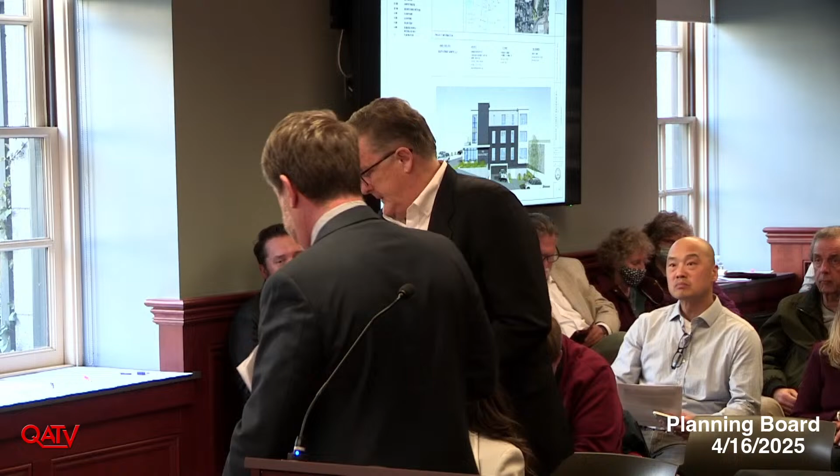Yeah. This will forward, okay.

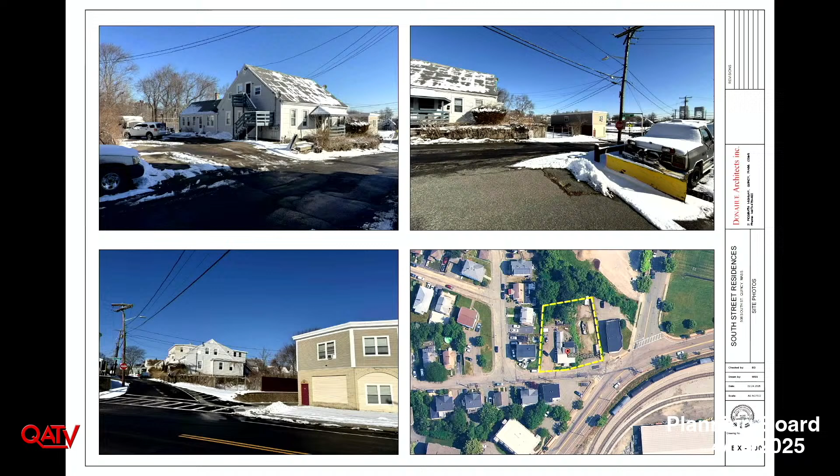Madam Chair, members of the board, Brian Donahue, Donahue Architects, 27 McGrath Highway in Quincy. We were retained by David and Cindy to look at this site in the fall, and we noticed the site had some challenges to begin with. So the site, in my mind at least, is a buffer between a residential zone and a very industrial zone. We all know the shipyard is diagonally across the street. So we've got a real transition here.

So what we tried to do from a design and aesthetic standpoint is find a happy medium and mix the two. These first slides show the existing property, the existing home. The lower right shows the site in context, with the shipyard to the lower right. So we're really on that precipice of the industrial area.

So what we tried to do was take advantage of the topography, although it is a difficult site because you have a drop in elevation from north to south, which is basically up and down on this aerial. From the top left to the bottom right, it drops about 10 feet. So we tried to take advantage of that to position the building and provide under-building parking with grade parking as well. More context photos, our site and the infamous shipyard.

So these two site plans, because we do have a level of parking below, show the grade. Basically on the right shows the lower level where we have 21 parking spaces. So 21 units, 21 parking spaces that Ed mentioned. Each unit will be deeded one space. And then there are 14 spaces up on the upper level elevation. And as Ed mentioned, those will be either rented or someone can buy those or deed them.

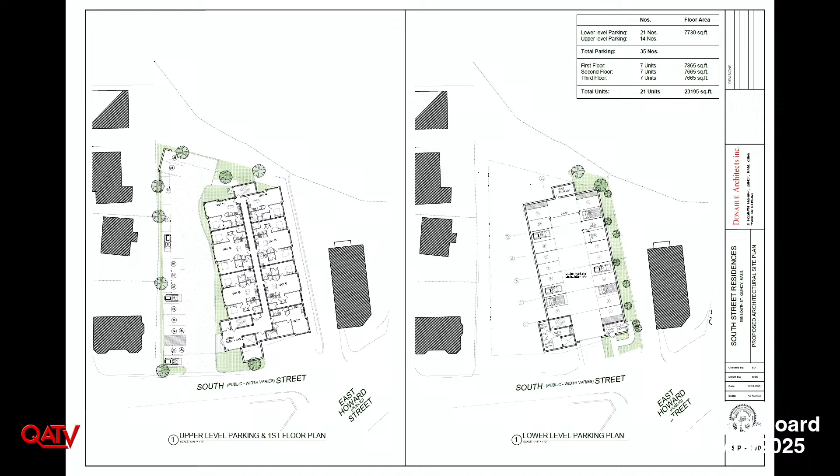So as you can see, as the topography changes on South Street, you enter the garage at the lowest level, and then at the upper level, we have the pedestrian entry into the building. The first level of units is at that level, and the on-grade parking. The floor plans are actually quite simple, and they work out with the parking grid below.

So these plans actually show 14 two-bedrooms and 7 one-bedrooms for a total of 21. We've already made a revision to go to 12 twos and 9 ones. So that's essentially getting rid of 2 bedrooms. And that is taking place on these levels here. Sorry.

On the second and third level, this is not working on this screen. It doesn't work on the TV screen. So this,

On the second and third floor, these 2 bedrooms will be turned into 1 bedroom. So like I mentioned, we'll be going to 12 twos and 9 ones. The area of the units, they're fairly generous. The 2 bedrooms are around 1,000 square feet, and the 1 bedrooms are around 620 to 650.

As I also mentioned, we have responded to the peer review. They requested that we designate the number of bikes in our bike storage area, which is at the end of the parking level, where we've now shown 18 bike storage areas back there. They also made comments about roof equipment and roof screening. So in our next submission, we'll be showing that we are providing roof screening for any rooftop condensing units, ERVs, mechanical equipment that's up there.

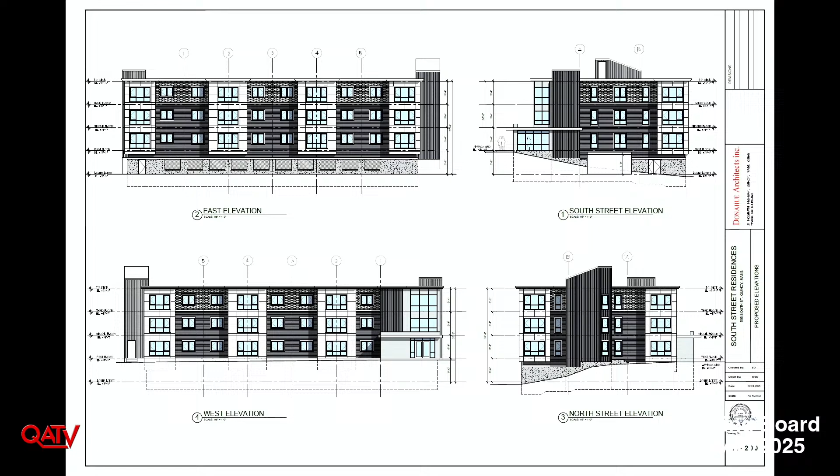The elevations, as I mentioned, the aesthetic is sort of a combination. We were using fairly common residential materials, lap siding, shingles. We are using some cementitious panel systems, and I like to go to the renderings. They always tell a better story. And then also on the front of the building, we are using some corrugated metal, sort of in deference to the industrial aesthetic that we're also going for. So the render views really tell what the building looks like.

As Ed mentioned, it reads as 3 stories from the upper level with our resident entry at that level. And then as you can see, the site drops down. We also have, and Chi-Man will get into this a little bit, a transformer which is located at the front of the building, and he will go through where that is and the screening that's taking place for that.

The windows are really a major part of this design. Although the units are generous, we're trying to get as much light into them as possible. So in living room spaces, we've got floor-to-ceiling windows. In bedrooms, not so generous.

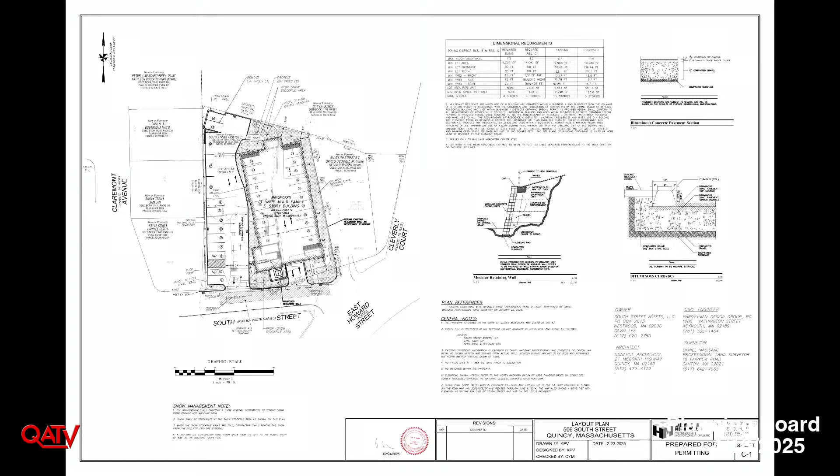The site itself has different elevations. You can see the upper parking lot is at elevation about 25, and at the curb cut on the lower entrance to the underground parking it's about 17. So you can see the elevation changes really quick, and the building design and the parking design are really taking advantage of the topography, and the site is not going to have a lot of cut and fill per se. It's just really getting the foundation and the building in. The earthwork is going to be very minimal.

For the drainage design, we have the upper parking lot area. We have catch basins and a stormwater quality structure that is going to be capturing all the parking lot runoff, and it's going to go right into, we have 2 Cultec systems. One is to mitigate the parking lot runoff. The Cultec system also has something called the isolation row, which is a treatment system so we can improve the water quality before infiltration.

And on the second system, the roof runoff from the building, from the roof drain, will directly go into the underground Cultec system under the parking area. And we laid it out trying to avoid all the foundations and so forth, to fit it in. It is a tight site, but we did the borings on site with geotechnical engineers, so we know what the soil condition is and what the groundwater elevation is, so we're working with that to design the system.

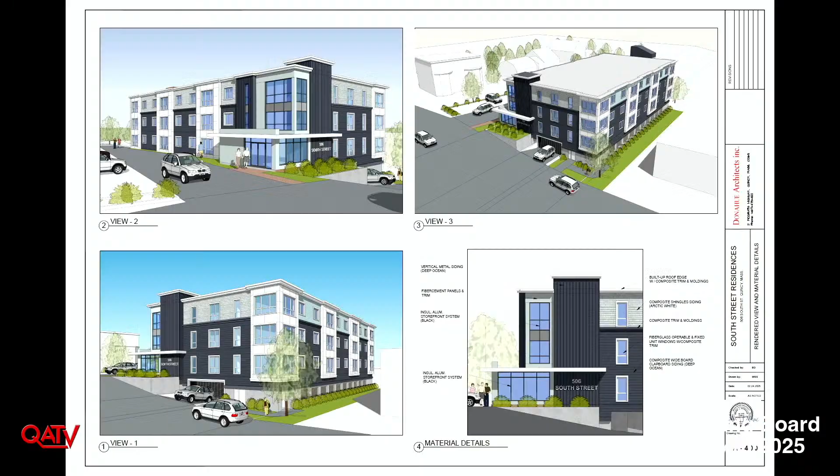Are you going to be on the driveway? Into that wall, and it's going to be serviced from the driveway. Yeah. So the retaining wall is going to be protecting that from the street side, and also we'll have a bollard. So what if a car's coming in the other direction and it could slam right into it? We'll have a bollard. Two bollards. You're going to have a couple bollards in front of it? Yeah. We'll actually have a short retaining wall, and also a bollard.

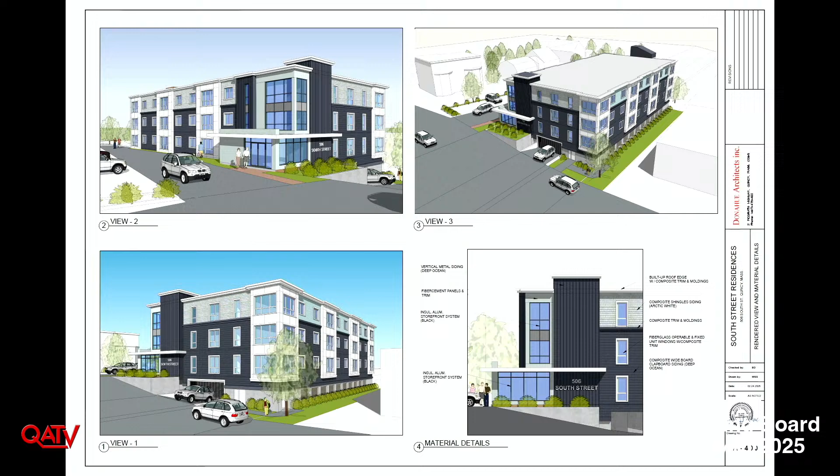Question regarding that door. That door doesn't look like you have a lot of room to hide a transformer there. The garage door? Mm-hmm. You don't look like you have 5 feet there between the retaining wall and that door. No, it will sit really within this area, between the building and the street. So you're going to be up top? No, it will be down, suppressed down to this level, and it'll be serviced from this area. So it won't be sitting on the green and protruding above, it will be sunken down to this level, and you'll be able to see into the transformer here, but it will be protected by a retaining wall and bollards. It'll be serviced on the driveway side, getting into the building.

So if it's sunk down, how are you gonna have fall protection there? It's gonna be below grade, right? It's below grade, so is there some type of fall protection there? Because you're gonna have a sidewalk, I assume, along the front of it, right? The sidewalk, we are in discussion. We got some peer review comments as well about making a public sidewalk, but we tried to discuss with the city about the sidewalk, because the existing grade on the street does not allow us to put in an ADA compliant sidewalk.

There isn't a sidewalk right now on this side, there is a sidewalk on the opposite side, so we're gonna work with the city traffic engineer on that sidewalk. I understand your comment, but we anticipate that these shrubs here, Mr. Shaughnessy, will be in front of the transformer, so you won't see the transformer, and there will be no access to it. But we can certainly put behind those shrubs some kind of fail-safe protection, just in case somebody were to. So is there gonna be any curbing along that wall?

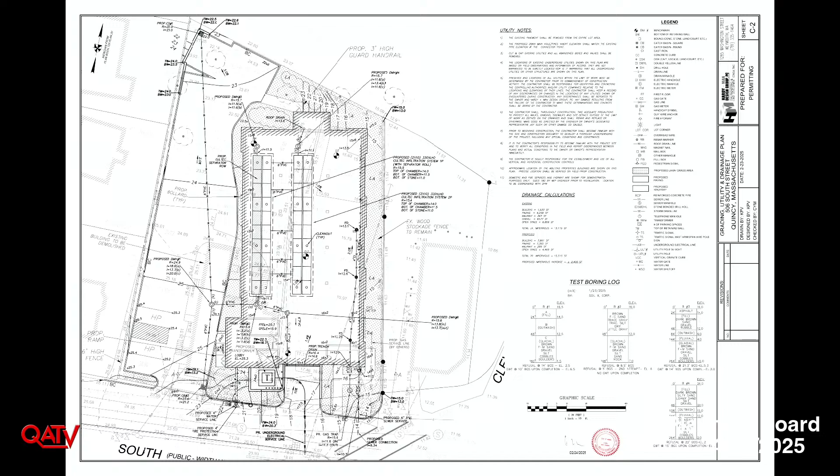Oh, the fence on, I guess, the western side of the property. I saw that there was a proposed fence, at least along the southwestmost property. Is there a new fence proposed along the entire length? I don't think we have one on the rear. I think we have it on the east and the west. Okay, but not the north. But a new fence on the west? Right. Along the property line, there will be a new fence, 6 foot.

And in fact, there was some discussion about utilizing maybe cap lighting on the fence, to answer your question about lighting, to light the parking along the fence, so that the fence would be visible when folks pull in. So would that cap lighting be visible from the other properties too? Is it on top? The cap lighting that's intended was to sit, I think, on the pillars of the fence. Although we could certainly utilize a different type of lighting which sits only on this side of the fence. That would be my preference, to avoid light spill. We'll do a photometric to make sure that it doesn't spill.

Okay. Trash. Could you just highlight what the plan is with that? Looks like it's to the right of the driveway entrance there.

The trash room is on the lower level and the garage door for the walkway out. So the bins, when you pull that apart. Yeah, so you're showing, I guess, four, I would say, average size bins. I generally live alone, and I know that I use two trash bins, right? I have a big recycling bin, I have a trash bin.

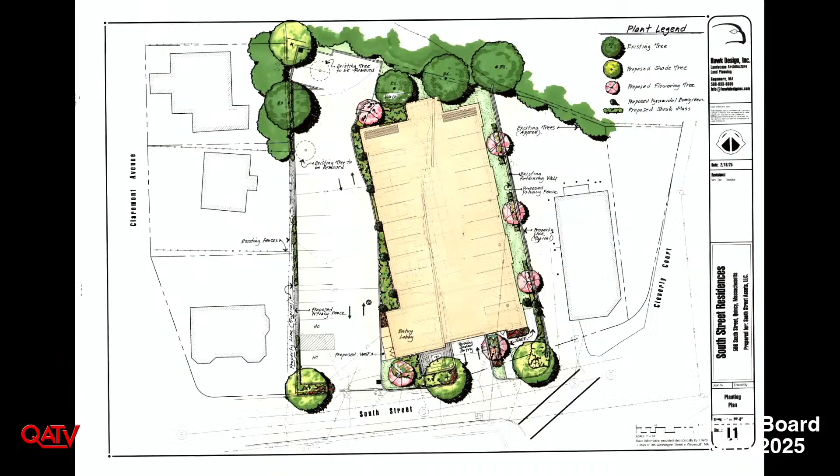So I think that should be given some look. And actually, there was another concern. There was a site plan that was just up that looked like it showed some land area along the frontage, and that one shows it as well, the transformer, and then some grass or landscaping in front of it. I don't know if that's consistent with the other photo we were looking at that seemed to show just the wall adjacent to the street. So I'm just wondering which one is correct.

The landscape plan and the civil plans are the correct plans. Okay. The three-dimensional renderings are meant to be schematic. And while we're on that subject, I just wanted to make clear that what we're talking about with the transformer was in an effort to hide it. We know it's been an issue of discussion, and we would rather not have it up at that level against the building, unsightly.

We can move the wall in the front out a little bit to get more clearance, but we thought it made sense to try and conceal it behind a wall, so it wouldn't be as unsightly as they can be. Yeah, I don't disagree, and on this plan it appears there's landscaping in front of it, so there will be that added protection, and I think it appears to be better than what we were looking at before.

I'll just mention the 2 areas of concern I have. First, I want to commend you for maintaining the large trees in the back. I do have a concern about the parking spaces being right up against the western property boundary. I know there's going to be a fence, but that's a lot of cars right up against the properties on the other side. So obviously noise, lighting, and there's no landscape buffer, no distance, they're not set back at all, so that's a concern.

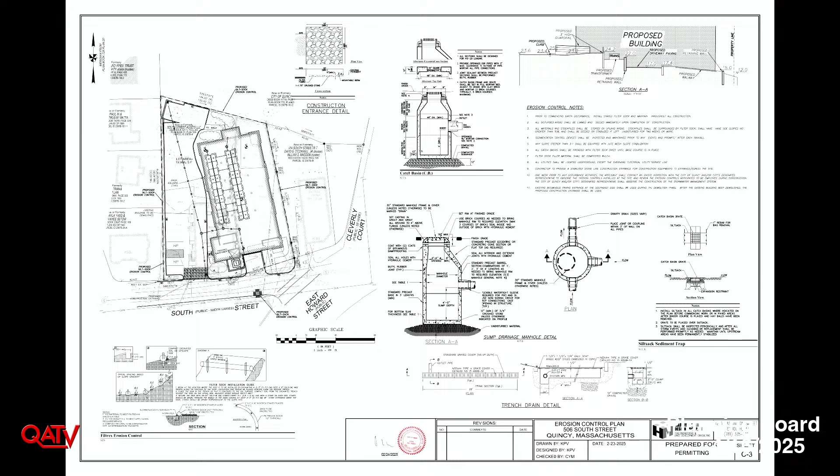We have setback relief because of the setbacks on the building, because of the unusual shape and the topography of the building, and the green space that's been raised by Member Kelly and Beeline. Those are the 3 issues of relief. The parking relief that we're seeking is being requested by a special permit here. Okay, thank you. Sure. Thank you.

Okay, would anybody else like to speak on this? Attorney Fleming, do you have anything else that you want to add, or are you good? I think we're looking at a continuance of this. Yeah, no, nothing further, and as Mr. Donahue indicated, we have amendments that we'll present at the desk.

Okay. Thank you. So we are looking at June 25th for this continuance because we do have a full May 21st schedule. So is there a motion to continue to that date? Motion to move it to June 25th. Is there a second? All those in favor? Aye. Any opposed? None. Thank you.

Okay. So we'll return to kind of regular scheduled programming from here on out. And so the first item on the agenda is a continued public hearing, 552 Hancock Street and 8 Ellington Road, Planning Board case number 2025-02. Thank you.

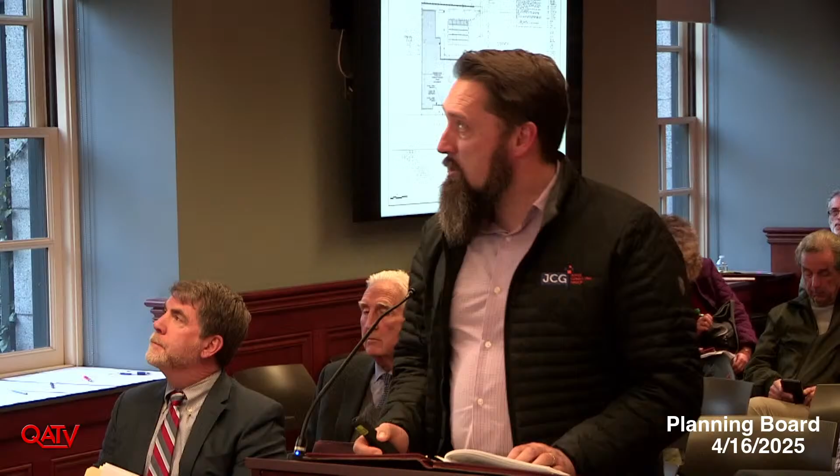So one of the main changes we made was originally the transformer was in front of the Fenno House to the left of the building. It was in this area here. It's being relocated to the green space here. There'll also be a proposed tree for screening in the front with the bollards around it. So that was one of the main concerns, I believe, last hearing.

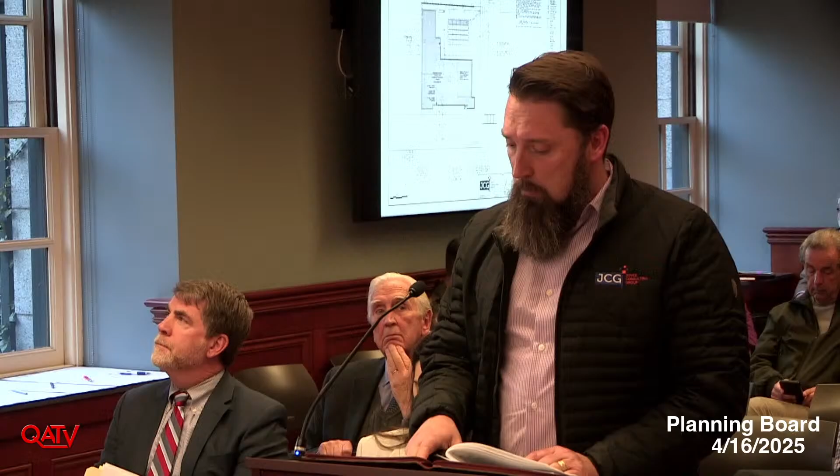There were also concerns. I'm going to run through what CEC had for concerns in their peer review and how we addressed them. One of the concerns was additional signage and details on signage for the ADA and striping information, which we provided. So this is just with the striping layout. They wanted to see the number of parking spaces, so we included that. There were some grading clarifications within the parking area. We provided that information to show that it's ADA compliant. It's coordination between the civil and architectural plans.

One of the other issues I believe that was raised was the trash area. Initially, it was pushed right up, more or less, against the property line. We've brought it within the building footprint. So it's totes, it'll be here, it'll be rolled out and picked up by a provider. I'm not sure what the time frame is on that, what the regularity is.

Then we had some stormwater revisions, but they were more technical calculation revisions, some updating of the operation and maintenance plan. And we also added, on the Fenno House side, there ended up being this localized low area. So we added an infiltration area to that side to address any stormwater runoff that may pool in that area. So those are the main changes from the civil standpoint.

And I'll just highlight, rather than going through the full presentation, some of the other changes. One of the changes that was raised, it was a concern about the trash that was located in this area here. There was concern raised that it was too close to the neighbor. So what was done was, there was initially just a landscaping strip of bushes along that area. That was now replaced by a fence, and the trash room is now enclosed as opposed to being an open trash area. So that's done for the protection of our abutting neighbor.

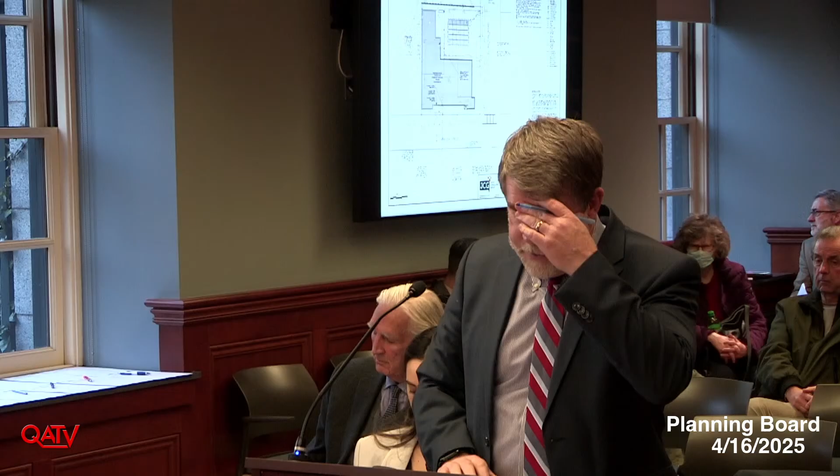Also, because we removed the landscape strip along this particular area, that grass area that abuts the parking area is now open grass area, and that can be utilized for snow storage. That also addresses the other concern. We provided a photometric plan as part of the new submittal, and that addresses issues related to building lighting and also pole lighting that was provided on the architectural plans.

There was a question raised, I think, by you, Member Beeline, about sidewalk improvements and issues related to delivery vehicles. I think Michael just addressed the delivery vehicles, and we provided an updated traffic report from our traffic engineer to the city's traffic engineer addressing issues related to sidewalk improvement, the removal of some parking spaces in the areas that were close to the intersection of Ellington Road.

We also provided the parking agreements that were entered into with the DeWare Funeral Home and also the Fenno House that allow parking in those particular facilities during busy hours. We were unable to reach an agreement with the supermarket across the street, and also unable to confirm their zoning compliance because it was done through a PUD zoning provision years ago. But there is a parking lot with 26 parking spaces in the front of that parcel that was developed as part of that development to allow for parking for businesses in the area.

So that's our presentation this evening. We're comfortable that we've responded to all the peer review comments, and I believe the department has a recommendation. Okay, thank you. Does anybody have any questions for the applicant? No? Okay, so this is a public hearing. If anybody would like to speak, you can come up to the podium.

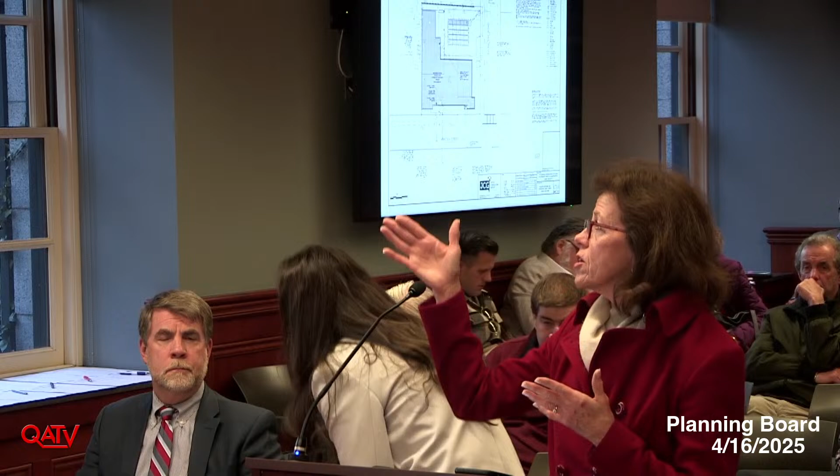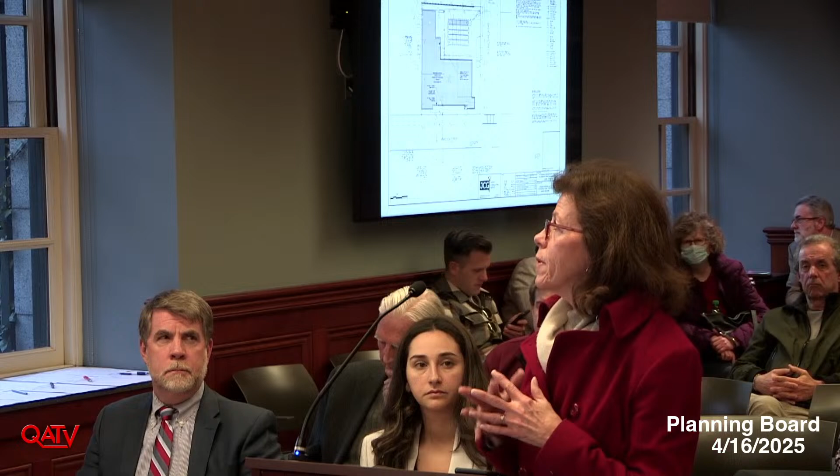I reviewed the plans that were online for the deliveries and so forth, and it appears that all deliveries will be down through Ellington Road. With DeWare Funeral Home right across the street, they've rejiggered their parking lot, but any day that they have a funeral or a wake, our road is lined with cars participating with the services. We have many residents on our street that have multiple cars, so our street becomes more narrow all the time. We have often had instances where emergency vehicles, particularly fire trucks, sit at the top of the street and just lay on the horn because they cannot get down Ellington Road.

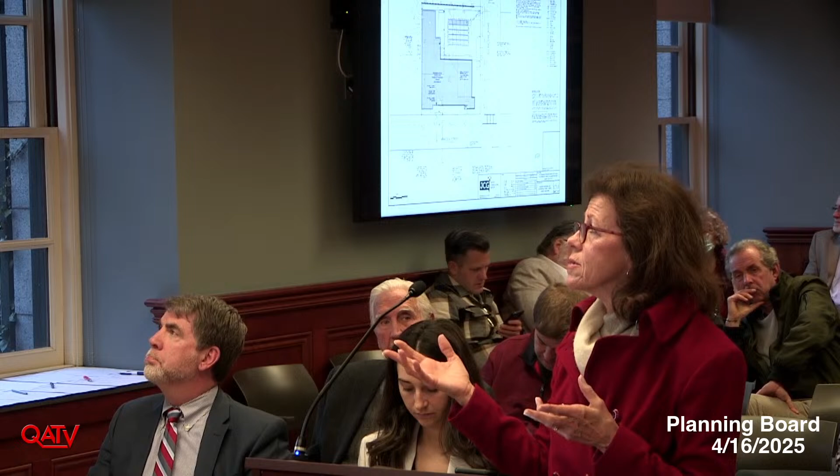Time is of the essence in such a circumstance, and my concern is, unless you're going to tell us that we can't park halfway down Ellington Road during construction, how are these 18-wheeler trucks, demolition machinery, where are they going to be positioned to do all of this destruction, to remove the existing buildings, materials being delivered? What is being accounted for the storage of materials, machinery?

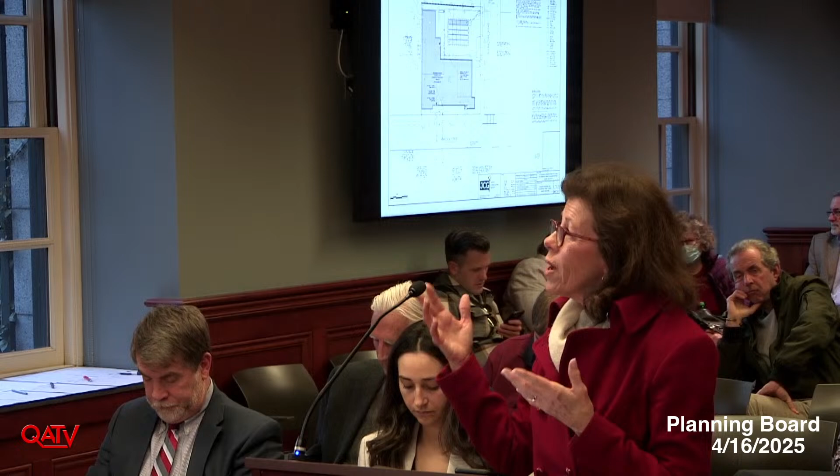And I know I had asked when this was first raised a couple of years ago, I think, about a traffic study. The traffic on Hancock Street has significantly changed. So what do we anticipate is going to happen, especially with the new Asian markets, the multiple traffic lights? And the gas station that's diagonally across the street creates chaos many days with people trying to go different ways into the parking lot and across Hancock Street.

I'm really concerned, and in the snow, if we have a bad winter, how is Hancock Street going to be able to do sufficient snow removal to accommodate the cars that we have as residents, as well as all this extra materials and so forth? I think at a previous meeting, someone had said that DeWare had offered an ability to put dumpsters and store some materials there, but they're so busy, and you certainly can't store it at the Fenno House.

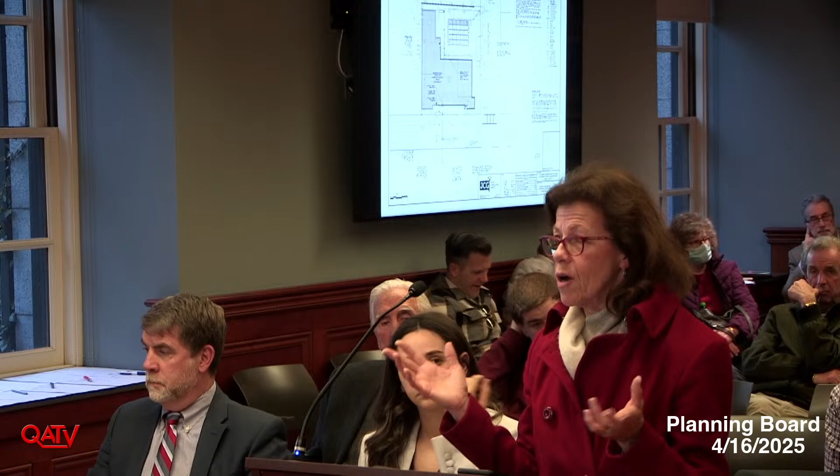I wonder what the expectations are for all of the materials and so forth that support this. I just think all of our neighbors, and unfortunately, we were not invited to the last meeting, so I'm not sure all of our neighbors on the street are aware of all of the expectations going forward. Thank you.

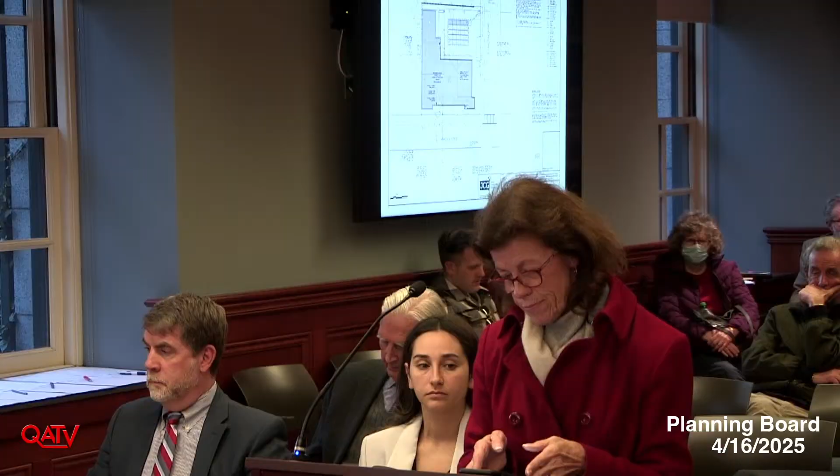Can I add one thing? Yes, you just have to come up again. Yeah. Thanks.

I just want to add one thing, going back to what the previous speaker said about the construction and renovation at Fenno House. It was a big project, and the residents went through it, and it was a lot of disruption in their daily lives. This will add to that disruption again. Plus, in retrospect, there's still a lot of remediation going on to the renovations that they did for poor construction. We have leaks in windows, leaks in decking that overflows into the building.

So they just did a rehab in our place, but they're gonna build a whole thing there, and what's gonna happen? It's just a lot. We think the church needs a rehab, a fixer-up, but this is like putting the hotel on when you're playing Monopoly. You get the hotel next to all the nice little houses. Like you said, nice little neighborhood. It just doesn't fit. Thank you.

Anyone else from the public wishing to speak on this application? Yes, ma'am. Hi, Kathy Daly. Could you just provide your address as well? 10 Dunbarton Road. Thank you. I had a couple questions. How many crosses are gonna go up on this, one or two? I think there was some back and forth. Okay, I'll have the applicant answer after. And about how many apartments? Is it 2 or 3?

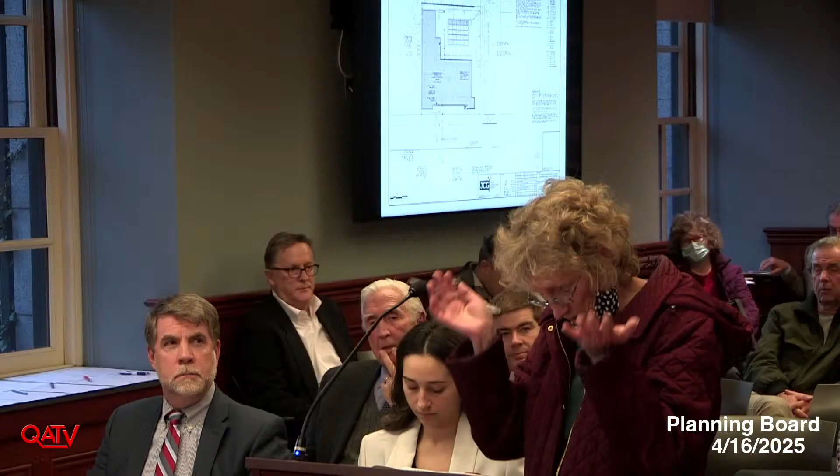And then next, about the deliveries, what is all this delivery? I'm not sure what we're delivering. Is this all food? Because I know meals are being served. So is this some type of a restaurant? It's not a restaurant, no. Okay, I'll have the applicant address the use. I just didn't know if that had to be licensed separately, if we're gonna be doing food in and out and trash for the food pickups and whatnot.

And other than that, I've been in the church. It's in tough shape, there's no question. I know it does need renovations, but I've been coming to most all the meetings, and I'm just gonna say it again: you're not remodeling a church, you're building a community center and calling it a church. That's all, thanks. Anybody else from the public wishing to speak? Yes, sir.

Good evening. I'm Tony Rubino. I live on Ellington Road also, and I just want to echo what some of the other speakers have said. This is just way too big a project for a residential neighborhood. There's going to be too much noise, especially if they're starting at 7 in the morning. And the deconstruction of the existing church is going to be a nightmare for the residents, as well as the building of the new building. It's not a commercial area. It's a commercial property that's going in there.

It's just too big an undertaking for a side street in Quincy. And that's all I want to say. Thank you. Okay. Anyone else wishing to speak? Yes, sir.

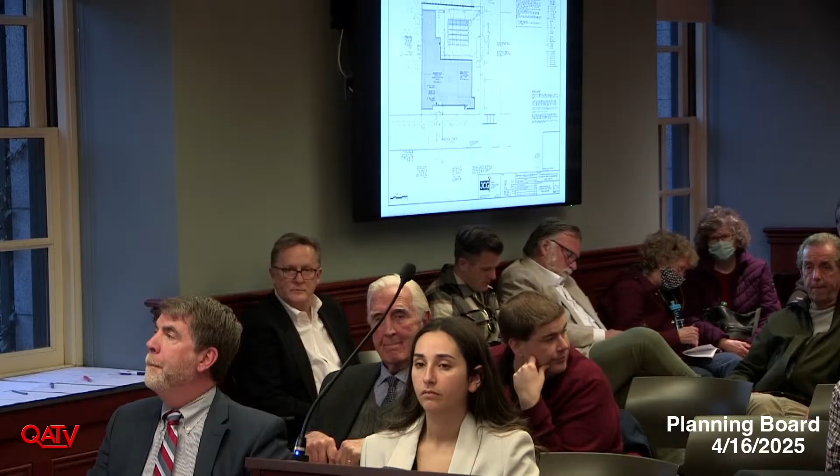Sure. So with regard to the apartments, there was a lot of reference to the apartments. This is a church and a social service community center. It's exactly like the church is operated today. The church provides social services, and it provides obviously religious faith services. The three apartments that are located on the top level of the building are actually for the pastor, because the pastor's home in the rear of the site is being taken down.

So it's for the pastor and for visiting pastors. It will not be rented out separately. It's just private use by the church and by the social service center. There won't be any deliveries really made to and from the site. In fact, we had indicated in an earlier meeting that we expect very, very few deliveries to the site.

And we actually provided a traffic study and a traffic engineering report by our private traffic engineering professional to the city's traffic professional, who reviewed it and was comfortable with the proposal as it sits today. The city's traffic engineer, and you can certainly reference her letter if necessary, indicated that she did not believe that this was going to create a large volume of traffic to and from the site or concerns about parking.

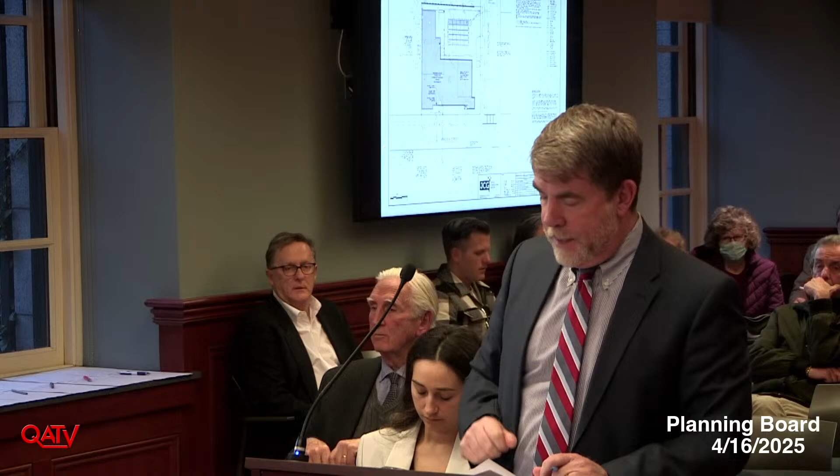The basement, as it's been used over the last number of years, is no longer available for use because it's not handicap accessible, so they had to utilize space on the levels above. The church actually takes up a majority of 2 levels of the building. So even though it's a 5-story building, there's really just a third, 4th, and 5th level, and the 5th level is those apartment units and the chapel. So we're comfortable that this is not going to have the impact that the folks in the neighborhood are concerned about.

With regard to issues related to construction, there is a construction management plan that will be required of the applicant to detail how construction vehicles will come to and from the site, how deliveries will be made to the site, and the fact that we removed that large section of building, which is now going to be an open parking lot, actually provides a great area on which a lot of staging can be done for the development so that it will not impact the streets. And any impact to the streets will be managed through the construction management plan.

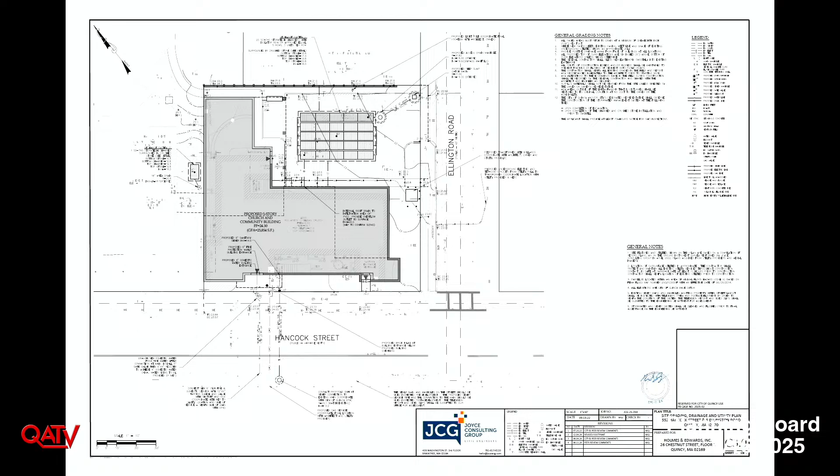I just want to raise, and I know the planning department will raise this as well, there will also be conditions related to an abatement of any asbestos. There will be conditions related to any noise disruption, and there's certain hours of operation when construction can occur, and there's also regulations regarding dust control. So those issues have to be managed during construction, and we're confident that all those conditions will be implemented within any decision that this board issues, but certainly that the city's inspectional services department will require.

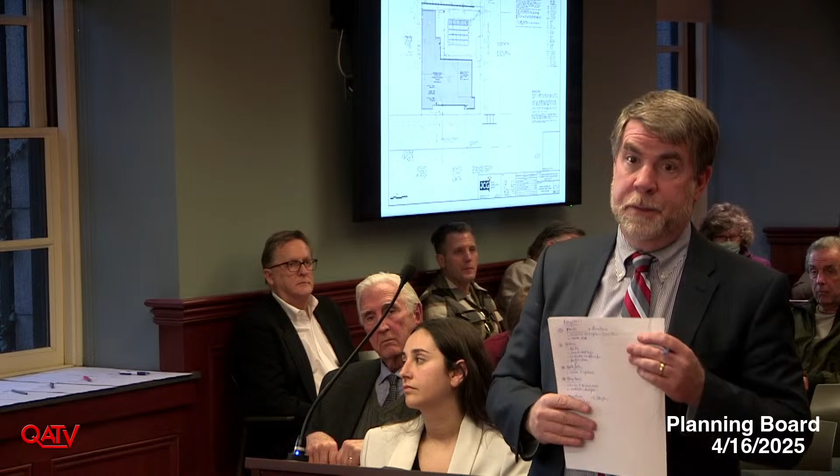Thank you. Okay. Does anybody else on the board have any questions? Madam Chair, if I may, just one thing. You know, I gotta say, it's a much better project than it was in the first round. You're in a neighborhood, you're in the city of Quincy. When you're choosing a contractor, please choose a contractor that hires men and women of the city of Quincy, not from Rhode Island and New Hampshire.

Okay, so I would agree with what you're saying, how it's much smaller than the original proposal. I guess one of my questions I would have for you, Counsel, with all due respect, is this a community center, or is this a social service center? Or you tell me what the difference is between a community center and a social service center. Tim, do you want to address that?

Hi, I'm Tim Wismar, 32 Piermont Street. I'm the president of the congregation at Wollaston Lutheran Church. Generally, we're continuing the same activities that we do there now. In the morning, seniors from the neighborhood come in and they do ping pong and exercises, and they take English classes, maybe citizenship classes, that type of thing. They sometimes bring food and prepare their own meals in the kitchen to share with other members from the community. So it's kind of like a meeting place for elders in the community, with some activities.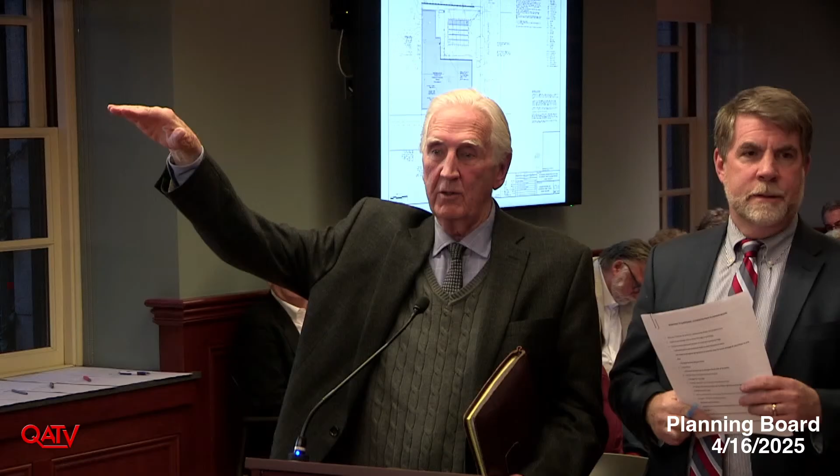There's a glass wall. My name is Jim Edwards with Homestead Edwards Architects. There's a certain height wall, and then there's glass above it to allow people a view. We could do sound attenuation, we could do a sound study on it, but I agree with Attorney Fleming that they're not gonna be playing games up there or anything.

I appreciate it, and I'm glad you refreshed my memory on that. Now that you say that, I recall you saying that we're gonna be doing quiet stuff, and I get it. And with regard to the construction management plan, I certainly understand and want to make sure that the neighbors are very familiar with it, but we can agree that as a construction management plan is prepared, we share that with the city councilor, and that we share that with the community, so that the community knows not only

who to contact regarding construction activities, which we want to make sure they have a contact person, but also a detailed schedule of things like major deliveries of equipment, staging, and things of that nature, so that we'll work with the community. We understand we don't want to be a disruption to Ellington. There's certainly going to be every effort taken to make sure that there's as little disruption as we possibly can, but we can agree to share that information as it becomes available. Thank you very much. Thank you.

Thank you, Madam Chair. Yes, all right, so I think we've heard from everybody in the public. Attorney Fleming, if you could just touch very briefly, just because I think it's important. So this is a church, it's protected use under the Dover Amendment. Could you just touch on that? Because I think you just need relief from this planning board, I would assume. I don't think you need anything from the zoning board, but I could be wrong. That's about right.

All right, so we're back on, and the next item on the agenda is the continued public hearing, 42 Lyons Street, Planning Board Case Number 2025-03.

Attorney Fleming. Hey, long time no see. Hey, hi, is that who you are?

Again, Edward Fleming for the applicant, Stephen Bayless, who's the trustee of 81 Faxon Park Road Realty Trust. As you know, Madam Chair and members of the board, this is a continued hearing from the February 19th hearing date. A number of concerns were raised by the community during that initial hearing. Among those concerns were issues related to the height of the proposed homes, the concern about the retaining wall that was located in the back of the site, and there were some requests for fencing around the site to provide that additional buffer. Other questions and comments were also made.

We actually had a really nice conversation with a lot of the neighbors right after the meeting. They again expressed their concerns about primarily the height of the buildings, and as a result of that, Brian Donahue made some significant architectural changes that he would like to share in a moment. In addition to that, we had outstanding comments that hadn't been responded to on peer review. And Jim Burke spent significant time responding to those peer review comments.

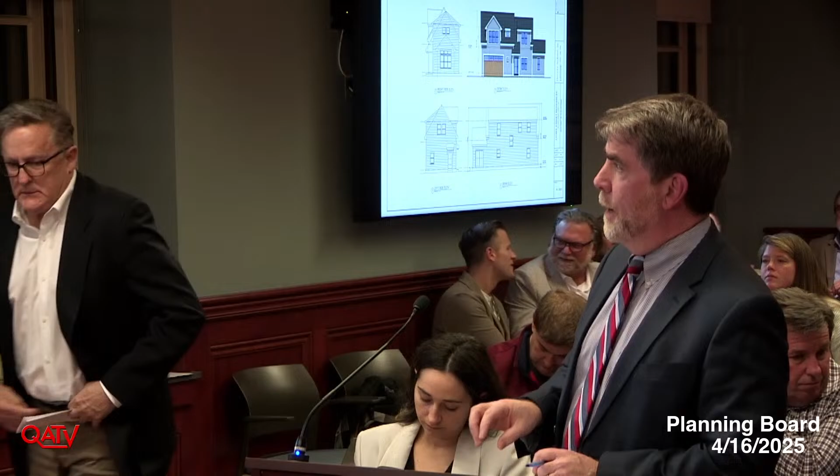Steve Bayless, through Councilor Devine, had an opportunity to meet with the neighbors yesterday. Had a really nice meeting with the neighbors, was able to share all these changes with the neighbors. And I'm not sure if any of the neighbors are here tonight, but the word from both the Councilor and Mr. Bayless is that the neighbors were quite pleased with the changes that had been made. So, thank you.

Brian, thanks, Ed. Mr. Donahue? Madam Chair, members of the board, Brian Donahue again, Donahue Architects, McGrath Highway in Quincy. I'll try and keep this brief because the changes, although significant, I think are actually what we were hearing from the neighbors. So we tried to respond to those and make significant changes to the building massing, the height, and so forth. So this cover sheet just shows an aerial perspective of the three homes that are on the site.

We are still maintaining a two-car garage with each home, a driveway in front for visitor parking or overflow parking. The same basic location of the homes on site. The original plan had a much smaller footprint. It was about 780 square feet. These are about 1,100 square feet. So although the footprint is increased, the square footage of the actual home is the same. It's just under 2,000 square feet.

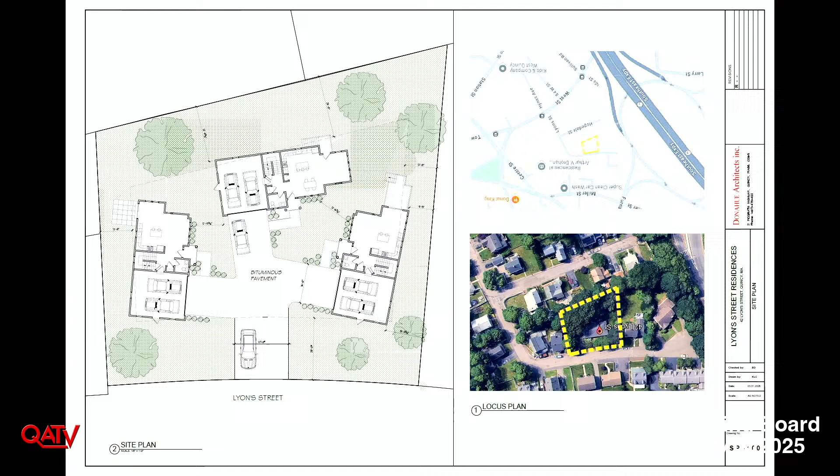A couple of the homes, the one on the left side has an outdoor patio because that part of the site is relatively flat. And as the site drops off in the back, we have a stair down to a backyard area for the middle home. And off the right-hand home, we have a deck off the dining space. This gets into the detail of the layouts. Again, two-car garage, access to the second floor, living, kitchen, dining, and 3 bedrooms above. 3 bedrooms, 2 baths.

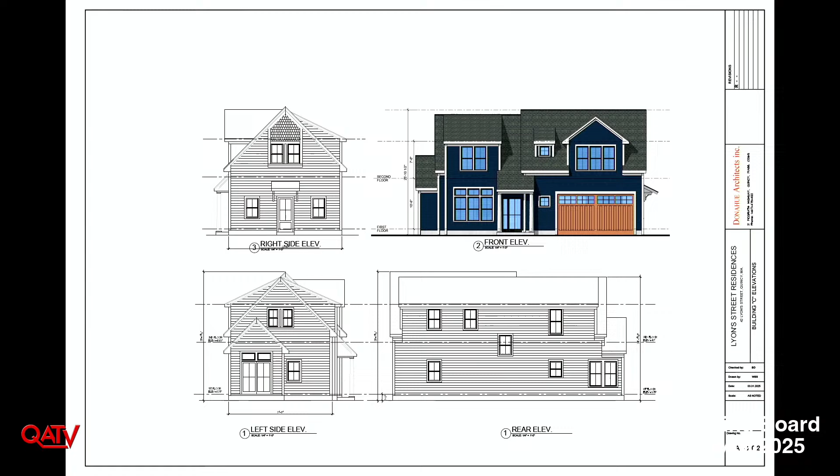And again, we've kept the same color scheme as we had on the other plans, so we have basically gone from 3 full stories to 1.5 stories. There is one diagram here that really shows the difference. So, although it's only a 7-foot difference from ridge heights, it appears to be a lot more, but it's gone from basically 35 feet to 28. And these renderings depict the relationship to the buildings. It's snug, but these are small cottages of less than 2,000 square feet, so we think it's a good fit. And that's basically the changes that we've made.

Did you want to talk about the removal? Yeah, sure. So, Jim, why don't you just highlight it?

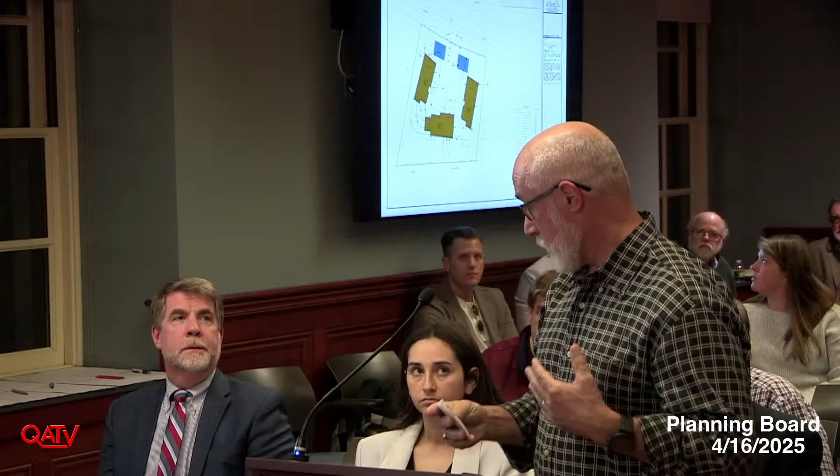Hi, Ron Petnelli, I live at 9 Hopedale Street. My wife and I live in the bottom right quadrant of the property, at the back. Speaking for Diana and myself, one thing we're happy about is they really respected our concern about keeping the fabric of the neighborhood. I know it's only lowered down 7 feet, but that's huge when you're thinking about angles of view. So we really appreciated that last night.

And especially listening to our concerns for privacy, because there were decks on the two houses on the right and in the back that would have been able to look over the fence at us and watching me sunbathe. They wouldn't go out on that deck more than once, trust me.

And the last one is, there are some massive oak trees, over 60 feet tall, that are there. We have a concern that I think is going to fall on probably you guys, inspectional services or something, that if they're not removed, digging the foundations for those two houses on the right and in the back is going to destroy the integrity of the root system, and that leaves those 60-some foot oak trees leaning towards us in any big windstorm. As it is now, we are terrorized every time it gets windy, because the back of our house is right there. So that's just something we leave for you guys.

But again, much appreciation for Bayless for listening to us, especially that meeting right after, and then last night, him explaining to us the stormwater runoff. I had no idea how that was going to happen, and he told us last night how they were going to bring it off to the front. So, thank you.

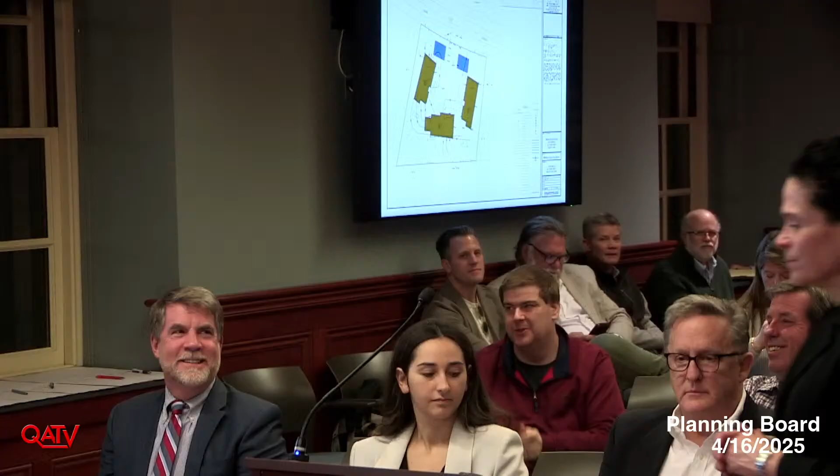Hi. Joan Falvey, 45 Lion Street. I'm right across from the blue square on the left. And I just wanted to thank the board and also the developers for listening to the neighbors. And I think what they are bringing forward is something more in sync with the neighborhood and fits in a lot better. So, thank you. Thank you.

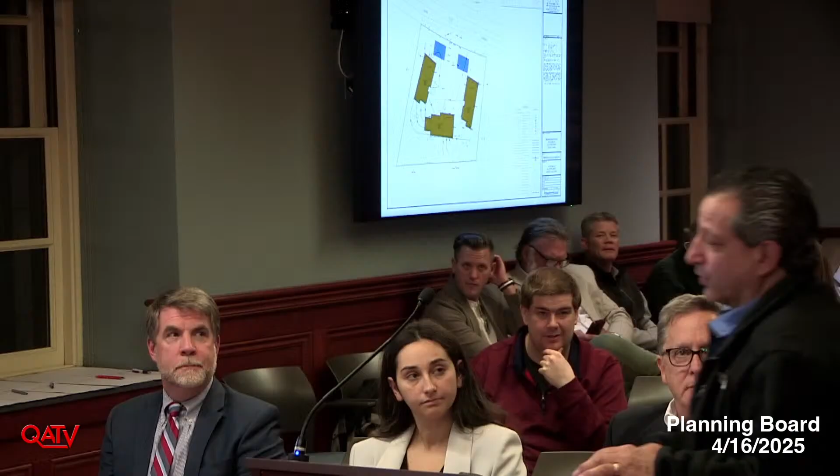And I guess last call, it's a public hearing. If anybody would like to speak on this application? Yep, sir. Lorenzo Scarnisi, 41 Lion Street. I'm directly across. And I just want to say that we had a meeting for the neighborhood yesterday. And I like the design. I'm definitely for the project. Great, thank you.

And anyone else? Councilor Devine, rising. Oh, you were, no. Good evening, members of the Planning Board. I just wanted to say kind of the same thing. Thank you very much to the neighborhood, the neighbors, the builder, the developer. Everybody worked together. It should be like this more often, where it doesn't have to be that difficult. Everybody worked together, talked about their concerns, and it went really well. And I think both parties are happy with it. And thank you for all your ears and listening and all you do. I really do appreciate it. That's it. Thank you.

And any other comment before we move to close? Can I say one thing? Yes. While we're here on that vein, it's nice to hear you coming up and saying that, and you're so appreciative. That feels really good, at least for me. I don't do this that often. But while we're here, and you don't have to do a phone call tomorrow, the trees that are threatening your property, are they on your property or are they on the developer's property? They're on the developer's. There's one in the middle, about 15 feet away from our property line, in the middle of the picture, and then another one that would be closer to where the houses come together.

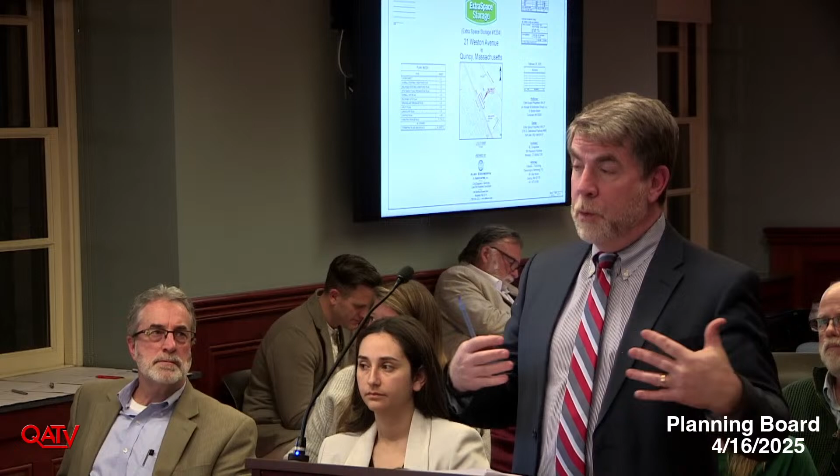The proposal, as I said, is like other similar storage facilities, which we could talk about in more detail. We think that this new storage facility, as it sits along the train tracks also, will provide a buffer for the residential community in the back. It will buffer the noise of the trains in that area and actually be a benefit, we think, to some of those folks.

We had an opportunity to meet with the child care facility, which is right next door to the site. It's actually owned by the Wollaston Lutheran Church, and Tim Wesmar and I and Dave met and had a good meeting. And Tim actually called me the other day to indicate to me that he was supportive of the proposal. In fact, what he did request, however, and this is kind of an unusual request we can talk about, is he wanted the lighting on our building to actually provide lighting on his parking lot and his playground. So that's something we can discuss and work together to help provide him with that.

His concern was sometimes there are vagrants, homeless, that sleep in that area of his property, and he wants to be able to keep it clear by providing lighting on that playground area. So we'll talk about that in more detail. So with that, I'd like to turn this over first to Kristen, or actually, we have the site plans up. So Mike, you want to just walk through? Yeah, so you can walk through the site. Sure. Thanks. Thank you very much.

Again, my name is Michael Dryden. I'm a senior project manager with Allen Engineering. Our firm is responsible in this case for topographic and boundary survey, the civil engineering, as well as the landscape architecture that we're going to walk you through this evening. I just want to spend a few minutes to walk you through the existing site conditions, orient you, and give you some of the stats. So this is the overall property. And Attorney Fleming did a nice job to give you some of the stats. I'll try to minimize my redundancy here.

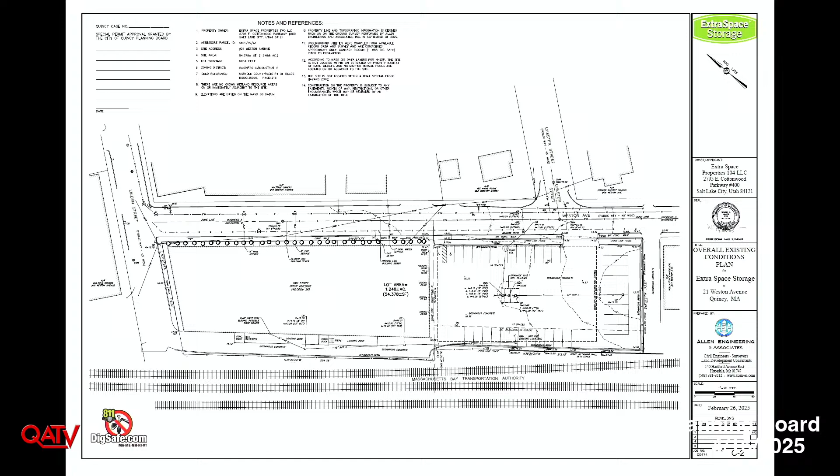So the work area, I'm going to just zoom in on the right side of the site. Again, in the Business C district, you see the 34 parking spaces there. This area represents roughly half of the overall site. It's about 0.55 acres that we're talking about in terms of the impact area. The 34 parking spaces that you see are accessed via a single curb cut. You can see that it's generally across from Chester Street.

Not much else to report on the existing site. It's a paved parking area. It's relatively flat. You can see there is some grade change. Pretty deceiving, actually, in the field. It feels very flat, but in terms of the development, there's about 3 feet of grade change that we need to deal with, and I'll talk a little bit more about that.

Again, along the bottom of the page is the MBTA property, and you'll see that bold black line. There's a retaining wall there. I think there is a typo on one of the elevations, but to the right, you'll see BW, TW. That wall at its highest point is about 8 feet, and I just wanted to point that out. That wall we will not be touching. We're also subject to a 30-foot zone of influence from the MBTA property. We're well aware of that. We've already been discussing with MBTA.

What I want to spend a moment on is the drainage system that exists here today. It's pretty unique. There's a dashed line that you can see inside of that parking area, and it's labeled subsurface infiltration system, if you can see that. It's a very sizable infiltration system. It's 160 feet by almost 100 feet. And we were provided an as-built plan dated 1998 from the engineering department.

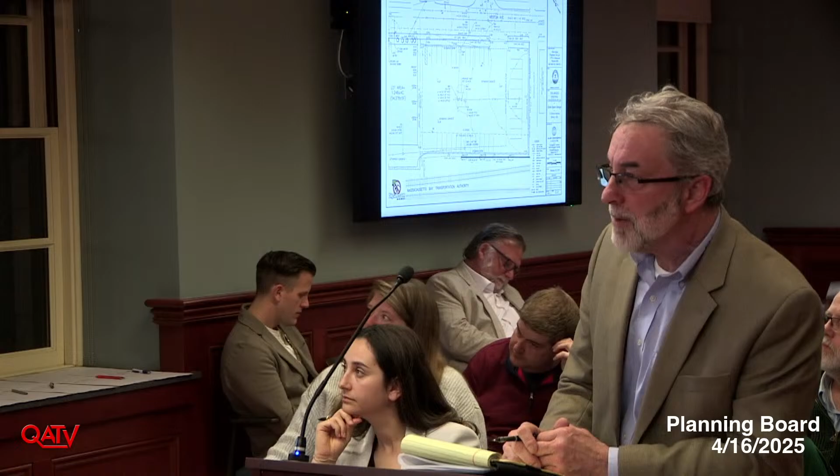So in this situation, you'll see along Weston Avenue, there's a circle labeled pump station. So the way this vault works is when that system becomes inundated, if you have a series of significant storm events, that pump station will fill up and float switches will kick on and it gets pumped right into the Weston Avenue drainage system. We, on several occasions, opened that pump station after significant rainfall events and didn't find any water whatsoever in that pump station. So that tells us that this infiltration system is doing its job.

We do know that the soil conditions vary significantly on this project site. On the south or the right side, the soils are very poor, and as you move closer to the north to the existing building, the soils improve dramatically. And that'll be important when we get into the proposed development. So, any questions about the existing site?

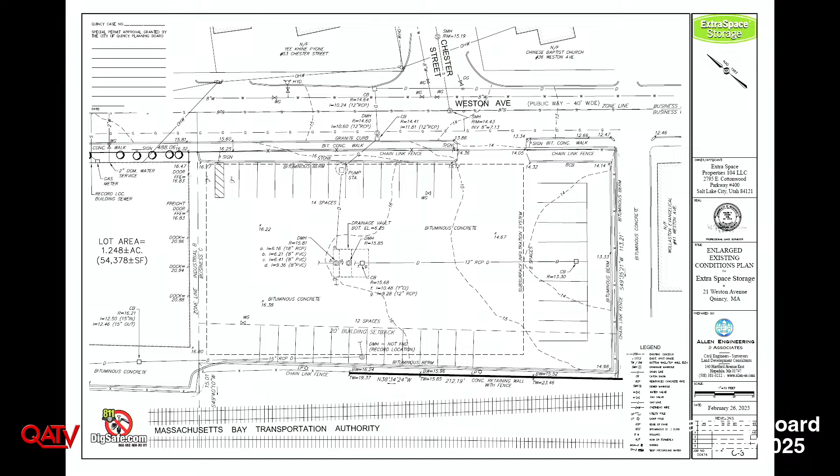We did meet when we had preliminary plans. We met with the engineering department to review this plan. It looked very similar to this when we met with them. And one thing that was brought to our attention is Weston Ave was recently paved, and they're not going to allow you to do any cutting into the pavement, trenching, whether it be for curbing or utility connections. So they stressed that basically the entire frontage of the site needed to be repaved. Nice clean saw cuts and all new pavement along the front of the site. So that's what we immediately got on the plans.

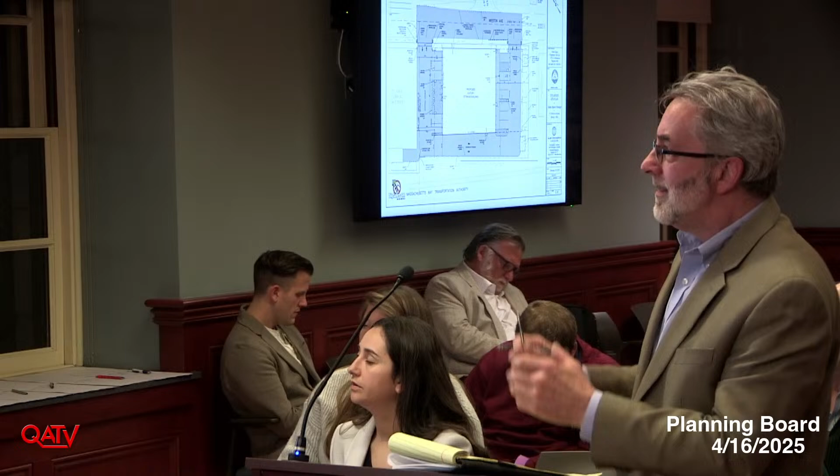And what I should have probably pointed out here is the proposed building is obviously the white box in the middle. That is where the building meets the ground. Difficult to see, and of course the architect will talk more about this, but there's overhang all the way out here. This dashed line you see, you can see the support columns. Same on the other side of the building. So the parking is essentially under the building. So the white area, again, is the footprint that meets the ground. That's 102 feet by 82 feet, roughly.

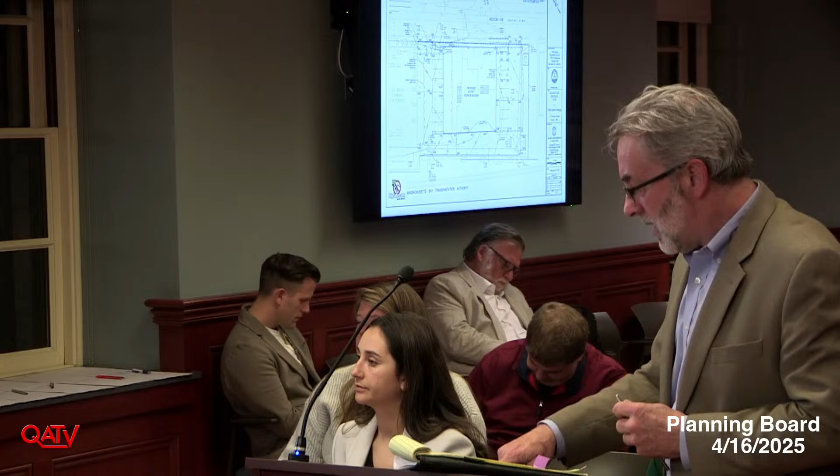So I think the next thing I'd like to talk about: I spent a lot of time on existing drainage for a very specific purpose. This is a redevelopment. Obviously, this development is going to impact that existing drainage system. That entire system needs to be removed. So I'd like to just walk you through how we are dealing with the drainage. I pointed out how big that existing drainage system was.

The new drainage system resides right here, this rectangular box you see. The inner box is the edge of the actual chamber system. It's called a StormTrap system. These are precast concrete units. They come in various sizes. You put the puzzle pieces together to suit your needs. Detailed plans were provided with this project for that StormTrap system. It's designed exclusively by that vendor.

So what's really nice about this system is the chambers are much taller in height. And I spoke about the pump station earlier; when we met with the engineering department, they really wanted us to get rid of that pump station if at all possible. The way we were able to do that is to take those very shallow, very low chamber systems and create much taller chambers so that when it inundates, it's high enough to flow out by gravity into the street.

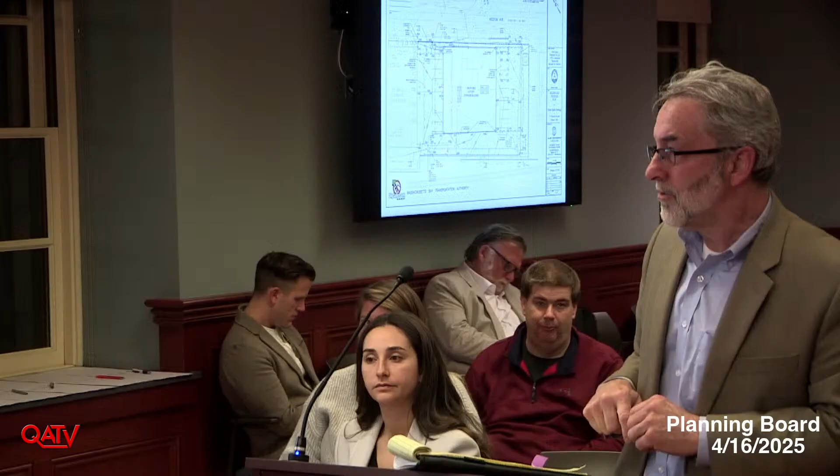So that's how we've dealt with this. And if you're at all interested in how that works, there is a schematic that I provided on the detail sheet later in the set that really shows you, again, in a very schematic format, exactly how this drainage system functions. So there are 4 catch basins essentially in the corners of the site. It's collected and piped into that concrete chamber system.

If it ever should surcharge, which again, based on the size and the volumetric storage of this thing, it's going to take a massive storm for this thing to surcharge. It will now surcharge, and the connection point is the same as it connects to today, but again, via gravity instead of a pump station.

If for whatever reason there's a problem with that pipe, it gets clogged, the catch basin in the upper right corner is set at a very specific elevation, so if everything else failed and this system surcharged, it would bubble out of that catch basin into Weston Avenue. Again, we don't ever expect that to happen, but typically when you design an infiltration system, you want a daylight situation, a fail-safe for it. So that, in this case, is the fail-safe.

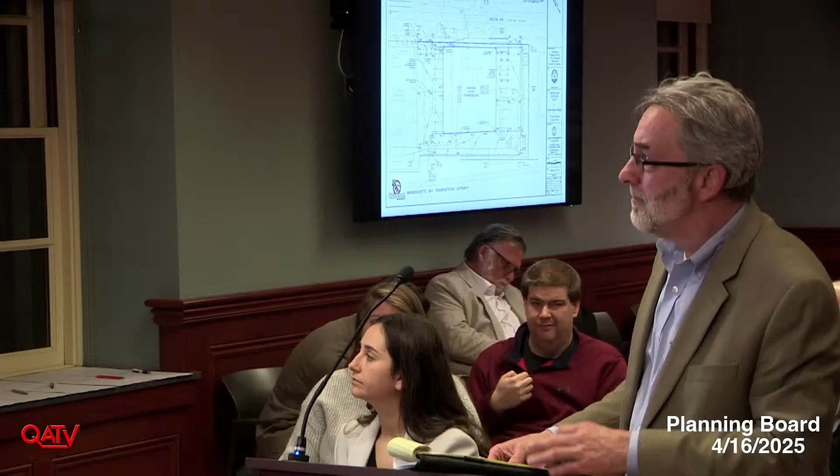A couple other things about the drainage system. Where that infiltration system is located takes full advantage of the best soils that we have on the site for infiltration. So it's most conducive for infiltration. That's another positive thing regarding their location. I mentioned the pump station. We were able to remove that.

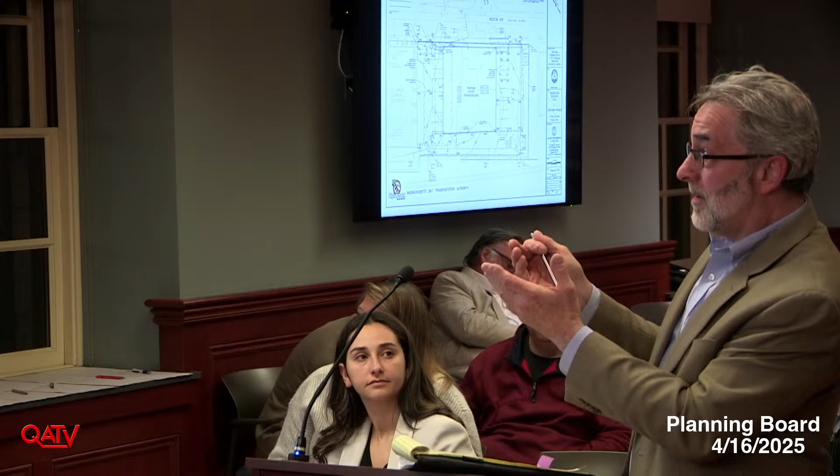The project just inherently reduces the amount of what I call dirty runoff. We have a parking lot where it's subject to oil, sand, all those things. Now we essentially have the vast majority of this site covered by clean rooftop runoff. So that's definitely a positive. The other thing is there's essentially no pervious area to speak of under existing conditions.

We are adding a significant strip here. That's about 1,600 square feet, which doesn't sound like a lot, but it's about 5% of this section of the site, this developable area. And I will talk about landscaping, but inherently, we've reduced the impervious on the site. We've increased or improved the water quality on the site and provided some infiltration where there's none today, just via landscaped areas. So in general, the drainage is what I would call a pretty significant improvement over existing conditions.

Quickly on utilities, all the utilities that we need are readily available in Weston Avenue as required under your regulations. The profiles are provided on the top for water, drain, and sewer. We've checked for conflicts. It's all pretty straightforward. You probably don't want me to get into the weeds on utilities.

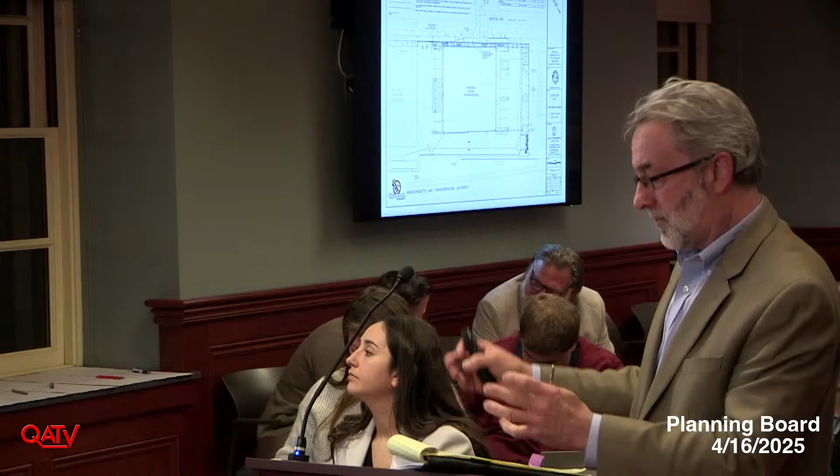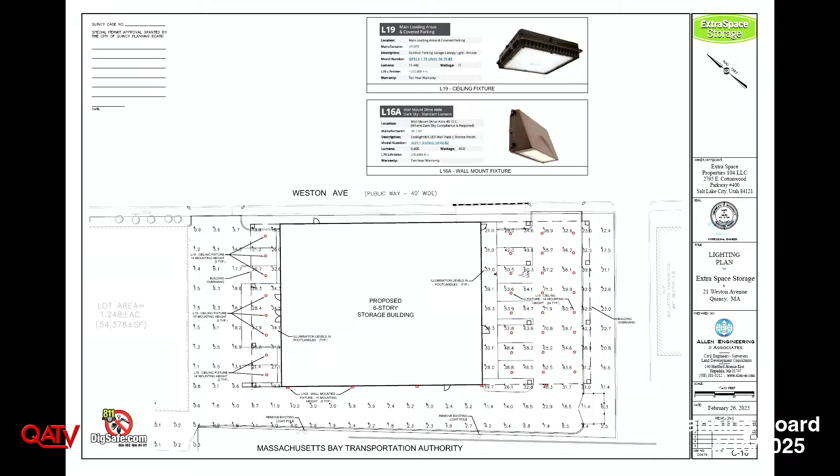But the lighting is provided, you can see the fixtures on the top of the page, those overhangs, if you will, that I described earlier. The lighting under those canopies is provided by the L19 fixture on the top, and then around the back of the building, there's some wall pack fixtures. I should also point out, there are two existing light poles here and here. Those are actually on MBTA property, they're actually encroaching. So those will be removed. We really don't need to maintain those light poles.

That's a brief overview. Happy to answer any questions you may have before we turn it over to the architect. Or we want to save them to the end? I think we save till the end. Okay. Thank you. You're welcome.

Hello. Do you have the architecture drawing set? Actually, this is, should all... Yeah, it should be. Is it in a separate file? Yep, there we go.

Oh, perfect. All right, so I'm Kristen Robbins. I'm the Senior Project Manager with BL Companies, licensed architect in Massachusetts. So as mentioned, the building itself is 76,424 square feet. It's a 6-story building, but with self-storage, we're able to keep floor-to-floor heights lower, and I'll show you in the elevations how we're able to get the 6 stories and still keep it under, so that it's not a high-rise.

As mentioned by Mike, you can see on the right-hand side where we have our entrance into the office is the larger parking area. So that's the extent that's all covered facing the daycare side. And you have entrance into the storage units, egress from the stairs, and the main leasing office. He also mentioned the grade change between each side of the site, which we've handled within the building with ramps and elevated floors between the loading side and the office side. On the loading side, we have a smaller overhang, kind of a drive-through area, and that's those double doors on the left.

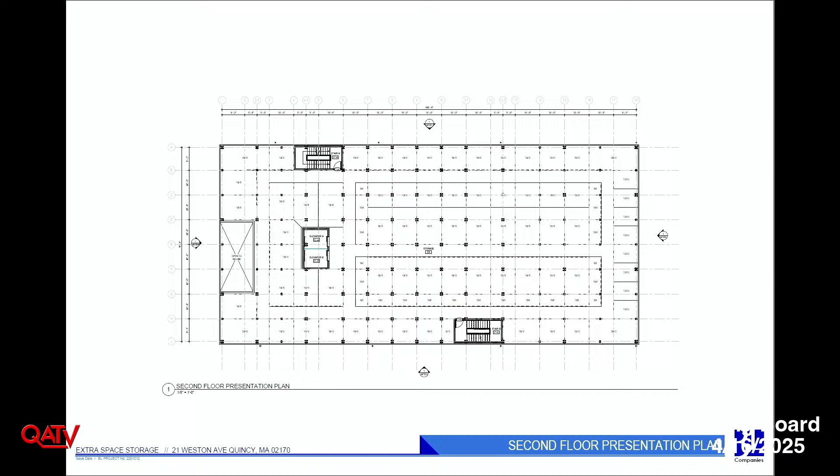So just to run through, we have approximately 680 units throughout the building. With Mike's design for the infiltration unit, we've actually designed much of the structure with this concept to make sure that we've laid out a structural grid that will work with those chambers and we can hold to the sizes that have been presented. So typical floors throughout. And we also coordinated our roof drainage with where it comes down and connecting to the underground system as well.

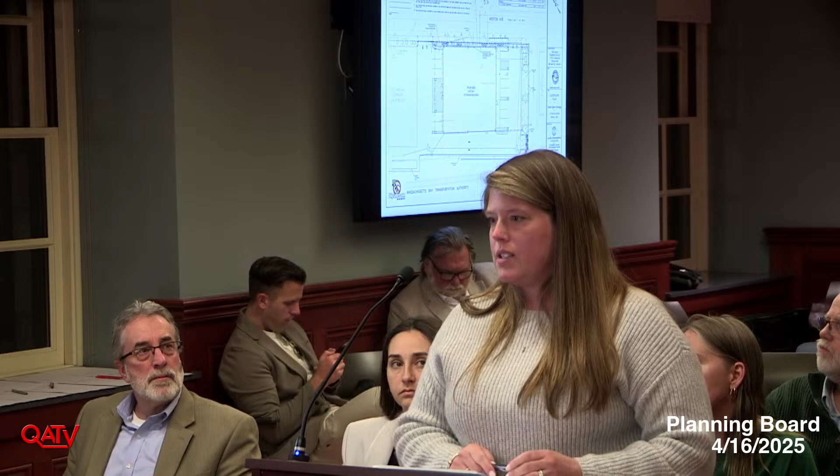There it is. Kirsten Braun, Traffic Project Manager with Chapel Engineering Associates. So we did the traffic assessment for this development. As was mentioned, it's about a 76,000 square foot expansion. This plan simply shows the two access points to the site. They're both full access with the circulation provided fully around the building. As part of our traffic assessment, self-storage facilities are generally a minimal impact traffic-wise.

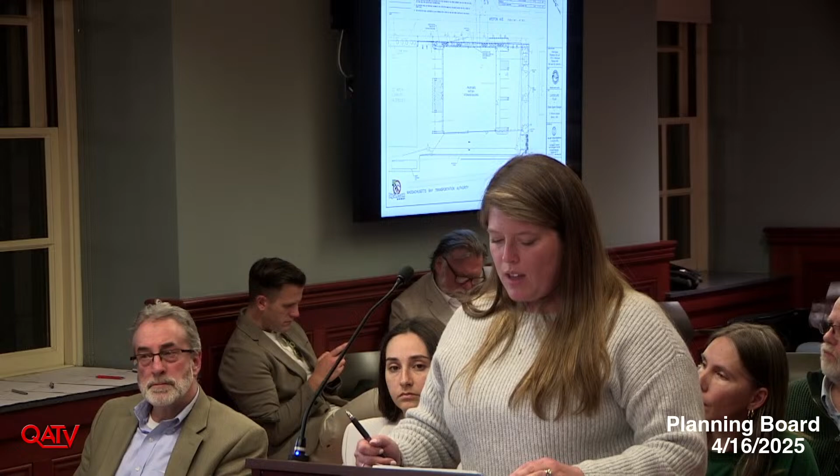So we did perform a traffic assessment, and what that does is we quantify how much traffic could be generated by the site, and then we provide a qualitative estimate of the impact on the adjacent streets, so how many trips we can expect on the north side of Weston Avenue and the south side in Chester Street. And we also take a look at the safety of the two site access points relative to sight lines and how the landscaping or the buildings impact visibility, just to make sure that the site is going to operate safely.

To start, though, we estimated the trip generation of the site. We actually did collect traffic counts at the existing site during the weekday morning, PM, and Saturday midday peak periods, just to kind of see what the site is generating today. And what we were able to do was to make empirical trip generation rates based on that data and the size of the existing building, which I think is about 46,000 square feet. So we took a look at that to see what kind of traffic we might expect based on actual trips going to the site today, because we expect a comparable amount of trips in the future.

And what we found is we can actually expect 5 additional trips during the weekday AM peak hour, 3 additional trips during the weekday PM peak hour, and 12 additional trips during the Saturday midday peak hour. And when I say that, that's not 12 entering and 12 exiting, that's total. That's exiting and entering traffic.

We also took a look at standard traffic engineering practices to use ITE trip generation data. So we also compared the data that we had collected empirically to the ITE. And what we found is ITE actually had slightly higher estimates, with 7 trips during the weekday AM peak hour, 11 trips during the weekday PM peak hour, and 13 trips during the Saturday midday peak hour. So we actually used that data in our assessment to quantify what kind of increase in traffic we'll see on the adjacent streets to provide a conservative assessment, though ideally we do think that it'll be more similar to the empirical data that we collected.

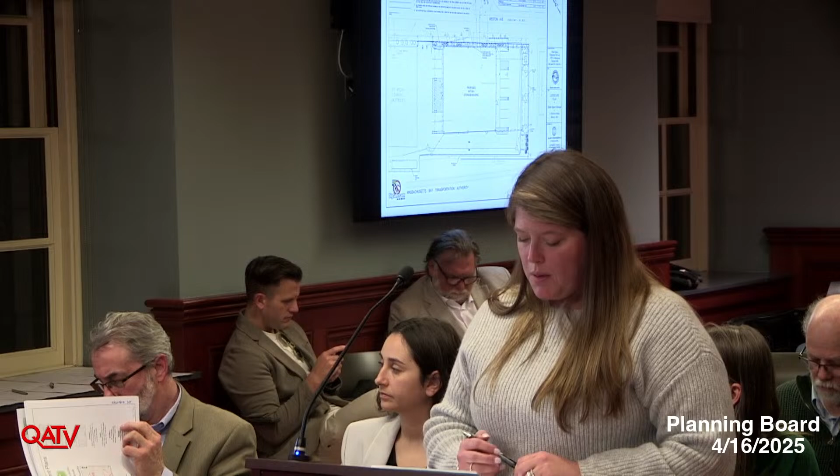So using those higher trip generation rates from ITE, we estimate on Weston Avenue about 1 to 3 additional trips north of the site driveways, which represents 1 trip maybe every 20 to 60 minutes. We expect the largest increase on Chester Street, just because most people will go across and head back towards their destinations that way, and even so, it's 4 to 7 additional trips, which represents 1 additional vehicle every 8.5 to 15 minutes. These increases are really negligible. You're not going to notice them on the adjacent street. I mean, traffic fluctuates day to day by that many trips as is.

So we also took a look at the safety of the site access points. The sight lines are based on the adjacent street speed of traffic, and as such, we noted that you have the minimum sight distance required. It's pretty much a straight shot down Weston Avenue either way. So sight distances are adequate to allow for safe operation.

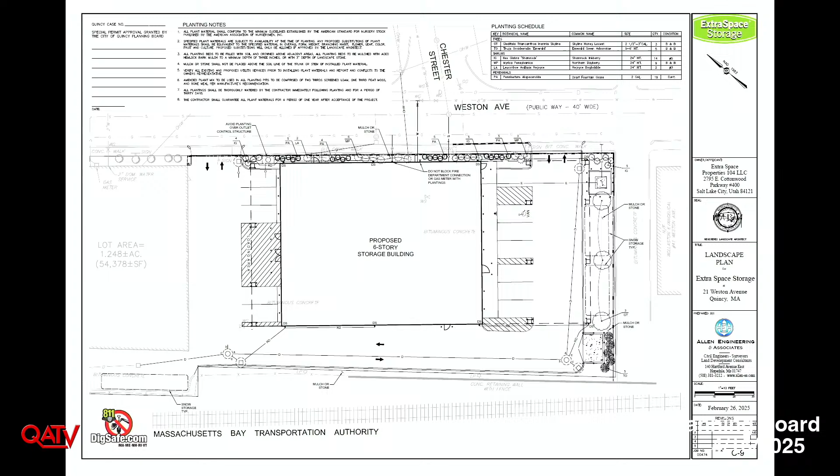Lastly, not in the study, we took a look after the fact at parking on site, because 12 parking spaces for such a large building seems like a minimal amount of spots, but we did take a look at ITE trip generation data specifically related to parking demand, and what we found was that 11 parking spaces are generally required for a facility of this size, and we included the entire site, so that's the 123,000 square feet. So in summary, these kinds of uses have minimal traffic impact, and the site access points will operate safely, so we don't really see a traffic issue.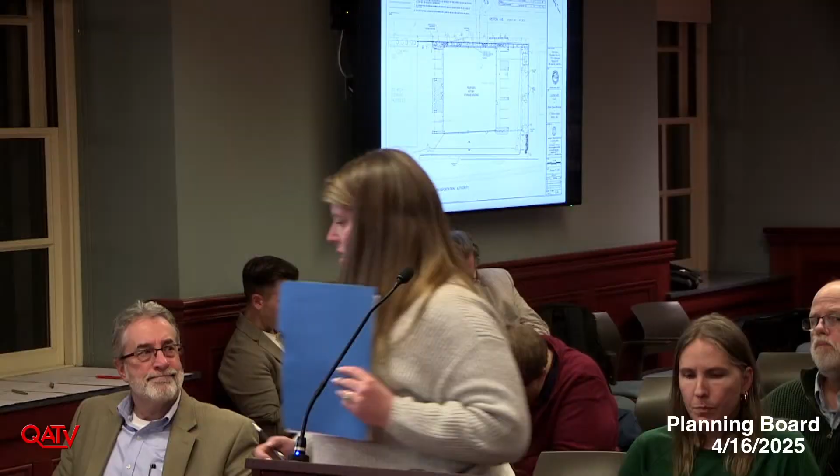Thank you. So that is the applicant's presentation, Madam Chair, and just to add to what Kirsten said about the parking, I analyzed the 2 existing facilities. One is 27 Liberty Street, it's 118,000 square feet. It has 10 parking spaces, and then one at 671 Washington Street, it's 123,000 square feet and has 13 spaces. So it's very consistent with the numbers that were provided. So that's our presentation. Thank you.

Let me see if anybody has any questions. I do. Yes. So everybody's heard of Extra Space before, they're all over the country. The developer, SDG, have you done these in other parts before? Is this your first one, second one, third, 100th?

Hello, I'm Dave Williams. I'm a principal of SDG Development and the co-applicant. I'm a development partner with Extra Space. We've built between 2 and 3 million square feet up and down the East Coast, but a lot in New England. As Ed mentioned, we built the one on Liberty Street back in 2014, something like that. So we've got a lot of experience in self-storage.

Extra Space is the largest self-storage operator in the country. They're very good at operating, but they lean on development partners to do this part of the work for them. So that's why we're... Do you guys act like a franchisee? Is that how they? No, they own the property, they'll own this finished product, but we're helping them develop it. So do they typically keep somebody at the building 24/7? Is it open 7 to 7? How do you get in the building, how do you get out of the building? Sure. So it's not open 24/7.

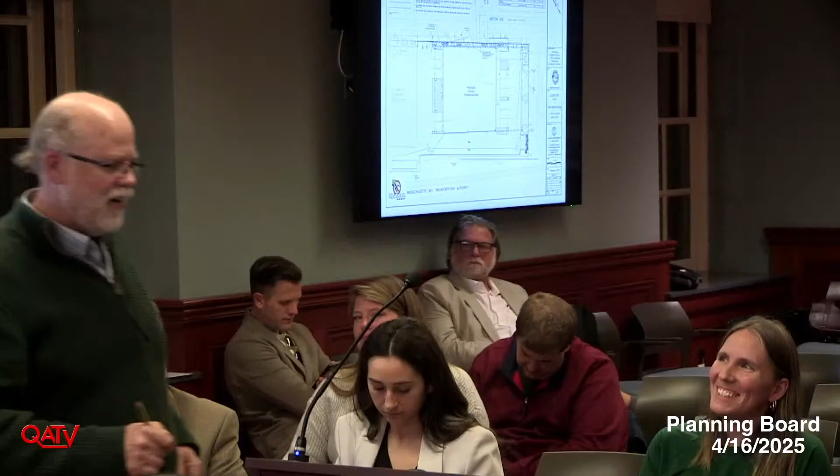I guess to the engineer. I've worked on many MBTA projects over my career. I know how the bureaucracy works. You mentioned that you have been in touch with the MBTA. I do believe this property will fall under the MBTA influence area. How quickly do you think you'll get an answer of what you need done? Actually, Dave can answer that better than me. He actually attended the meetings. What a joy. Lucky me. We first talked about this project with the planning group probably about a year ago.

We had a lot of site engineering that we had to get through. At that initial time, Attorney Fleming told us that we needed to file for a license with the MBTA. So we had a meeting right away. We have filed for that license already in anticipation. If things go forward, we know that the time frame to get that done can be long. So we went kind of ahead of schedule and we filed for that.

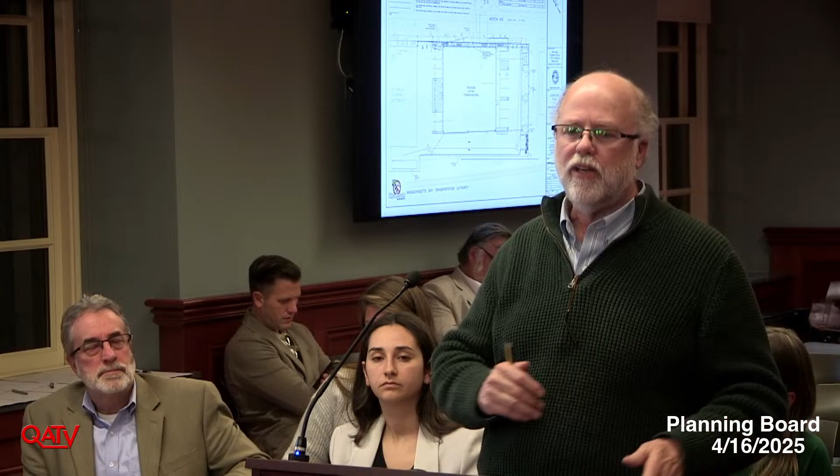The only reason why I ask is we've had other projects come in front of this board, and they have since been shut down. So I would see what you can do to expedite them. I know that's a very slim chance, but... Pushing a rock up a hill? Yeah. You're going to need that in order to proceed, before you put a shovel in the ground. Sure. Yes, we understand.

Like I mentioned, we were told that we needed to do it. We've taken it seriously, and we've already filed for that. Okay, so you'll start around 2028. Hopefully not. And then, go ahead, say it. And so you are the developer? Yes. Do you have your own crews?

Yes. You travel all up or down the East Coast with your crews? So lately our work has been local, but we're Massachusetts-based. We're both a developer and a general contractor. Okay, so when you're hiring extra people, the men and women of Quincy would love to work on a project. There's a lot of good contractors that live in the area that can hire the men and women

of the city of Quincy. So please keep that into consideration, because the building is going to be in Quincy. The taxpayers that live here should have the opportunity to work on a project in the city. Any questions? Yeah. On the infiltration, please, if you want to get up to the podium, please.

Great job explaining it. That caught my eye, that existing system, and on the sketch. So in my ignorance, I would have looked at stumbling upon something like that as a gift. Oh man, I can just incorporate everything into this existing system. You've chosen a different one, and I really, really like it. But for clarification, is that new system now going to handle 2 roof runoffs?

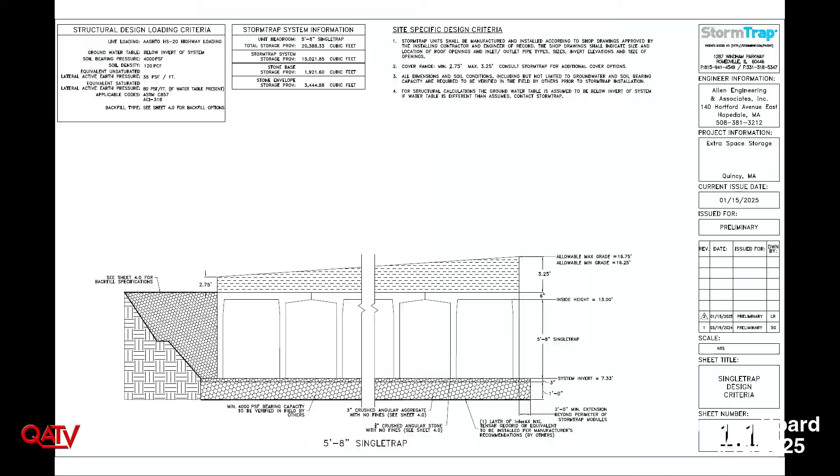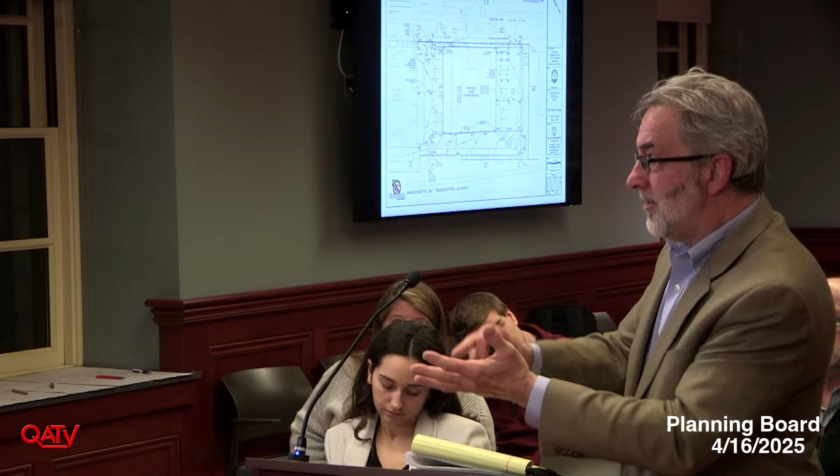No, it's great. I just wanted to clarify that it is still handling the other building as well. Yes. And one last thing, for my own curiosity, how often is a system like that cleaned out, maintained? Is there a maintenance plan on it? Yeah, much like your open detention basins, catch basins, manholes, we submitted an O&M plan with our drainage calculations that addresses that.

We relied on StormTrap for that particular component. They're the best resource. And there's also a lot of details on their plans that talk about maintenance, access, where access hatches need to be for inspection and maintenance, things of that nature. That's great. Thank you very much for the clarification. Thank you. I do just have a couple of questions.

So the existing building was referenced as a 2-story building, but it's kind of larger than a traditional 2-story. So what is the height of that existing building? That's a great question. There are about 11-foot ceilings in that building. I've been calling it a 2.5-story building, with a half story above. So it's probably in the 30-foot range.

Okay, I think we'll probably continue, and if you could, an elevation plan showing the difference, because it is significant. A 6-story storage building is significant. And this is probably a question for Attorney Fleming, I see that there's a residence across the street and there was reference to a condo. Have you done a neighbor outreach specifically, because it's a tall building that you're introducing to the site?

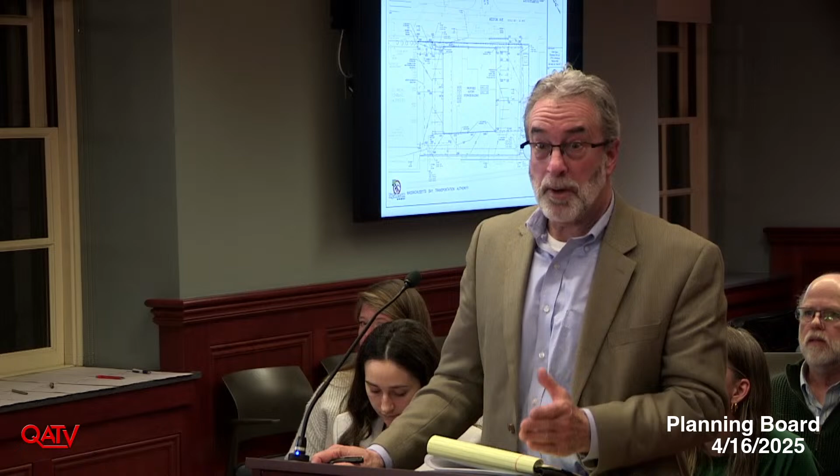That's a great question. I did reach out to the fire department. We sent them this plan. I had several conversations. They have no desire to bring fire apparatus on the site. To paraphrase, we don't want a fire truck next to a burning building. So what they would rather do is fight a fire from Weston Avenue. So I made it clear that smaller apparatus could circulate around the site, but in terms of a ladder truck, they have no interest in bringing a ladder truck on this site. That's exactly what I was told.

I mean, in terms of the clearance height. Yeah, I can add to that, that the building is designed as not to require the frontage on all sides of the building. We did our calculations, square footage, it's a fully sprinklered building, and we meet the requirements for it to be only from Weston Ave. Okay, all right, that's helpful. And then what is the clearance? I assume it's big enough to accommodate if somebody brings a U-Haul truck on site, right? So what is the clearance being provided there?

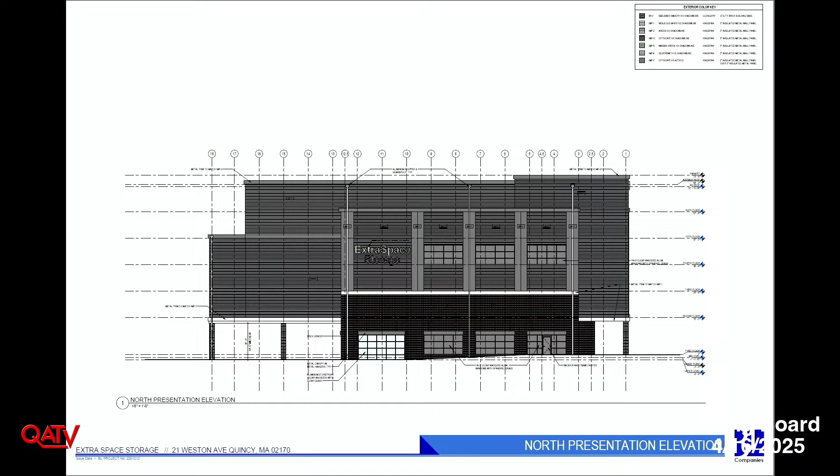I can't read that. Typically, 14 feet is kind of our standard. Okay. That's our standard for the loading area; it's taller than the loading area. Correct. And so would that accommodate even a larger truck, like an 18-wheeler, a Mayflower moving truck? No, it wouldn't accommodate that. So that would be accommodated on the street? We can check that, but it's not intended to accommodate that.

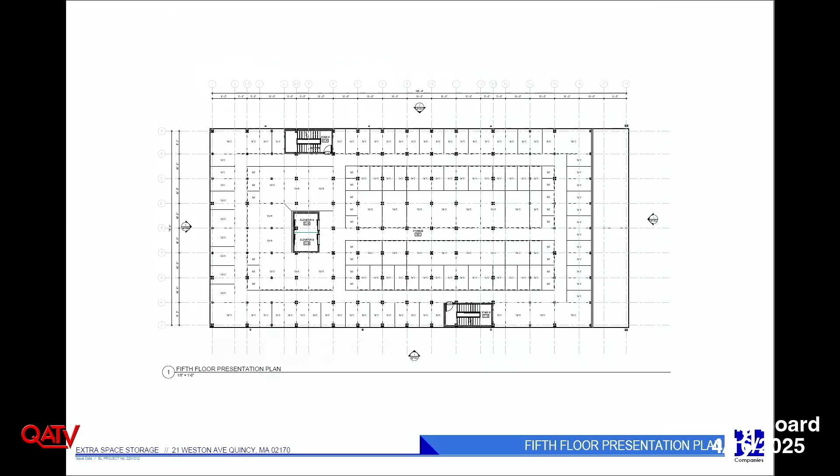And again, consistent with what the fire department told me, we have no interest in bringing a large truck onto the site. Yeah, but what if a user says, I'm gonna rent some storage space, they're moving their whole house out, where does that truck go? I understand the site's not designed for that, but that's a use you could contemplate. Correct me if I'm wrong, Dave, I think a standard box truck this site would likely accommodate, but a full tractor trailer, it's certainly not designed to accommodate that, even on the ground, let alone the height.

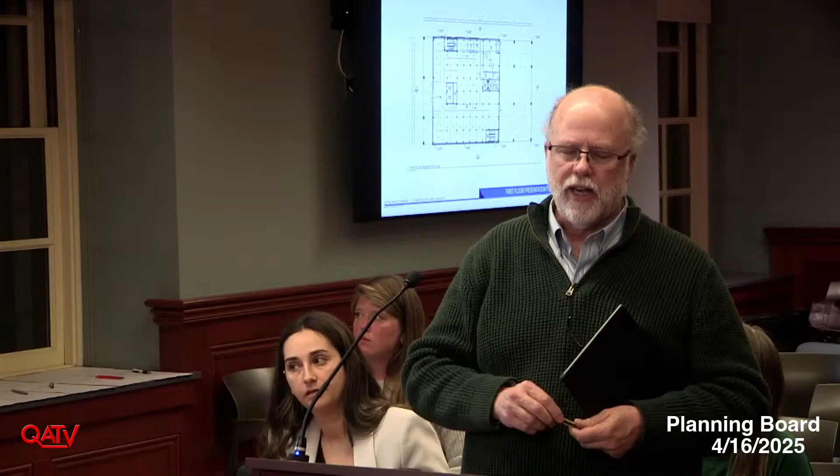And we don't typically have those vehicles in many of the self-storage facilities that we've designed. I can add that the existing building, in addition to having a loading dock on this side, has 2 loading docks on the side of the building. So a truck can back down the side and offload into the back of the existing building. So a long truck could back down the side? Yes. So if someone comes in with a tractor-trailer because they were moving cross-country and changed their plans, you can go right down the side of it? You can. It's very rare in a facility like this.

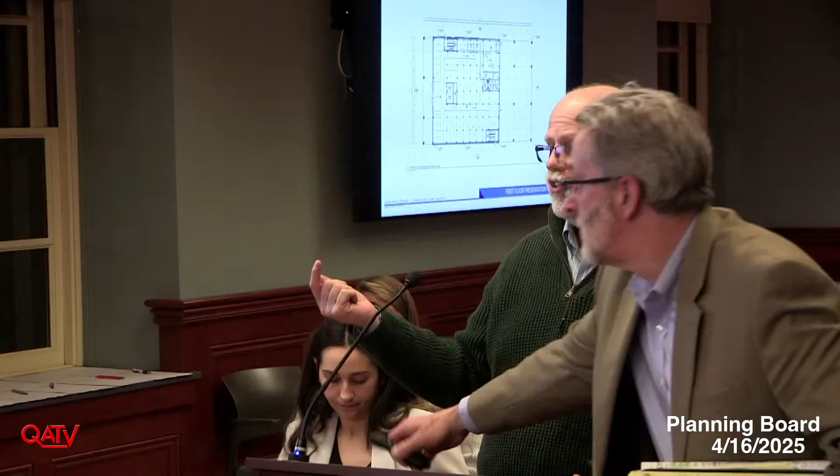We had the same question on Liberty Street when we did that. So can a bigger truck be accommodated, or how will you manage it? A lot of times you'll probably know what's coming, right? Yes, they'll call ahead. So how will that be managed, and can you do it on-site or at the sister facility? I think either on the back, or you could also back a truck in here with 14-foot clearance. You'd be able to get under that overhang.

You're gonna back all the way up. Just give me a moment, I'll show you what Dave's talking about on the overall site plan, right here. So right now, there are these two loading docks here. So a truck can back down here and offload onto one of these two loading docks to get into this building. There's enough height that a truck could back into here. You could manage it, yes.

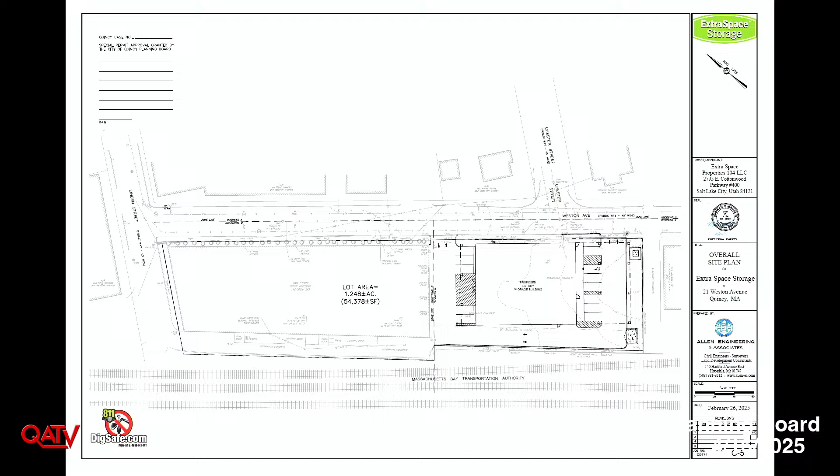So a long tractor trailer truck on the bottom left-hand corner, how's it gonna back around there to get in, like running parallel to the...? It would come here, but it would back down into here, and then pull out. Well, also, it's never gonna happen. Just to note, they're all small units, you see the size. Yeah, it's not actually gonna happen. Open to the sky, right? Okay. So the truck could back into the... Correct.

I have one other question too. Have you guys ever built one of these next to the commuter rail or the MBTA anywhere else? Because when you talk about a 30-foot setback, they also have the rules about if you foul the tracks. If you set a crane up there and it tips over, it fouls the tracks. I'm only thinking about the delays, they're gonna say maybe it's not 28, it might be 2038. So before, in that particular community, they didn't push for us to get licensing, and we built the building without. Well, this is the red line, so they're not gonna let you do that.

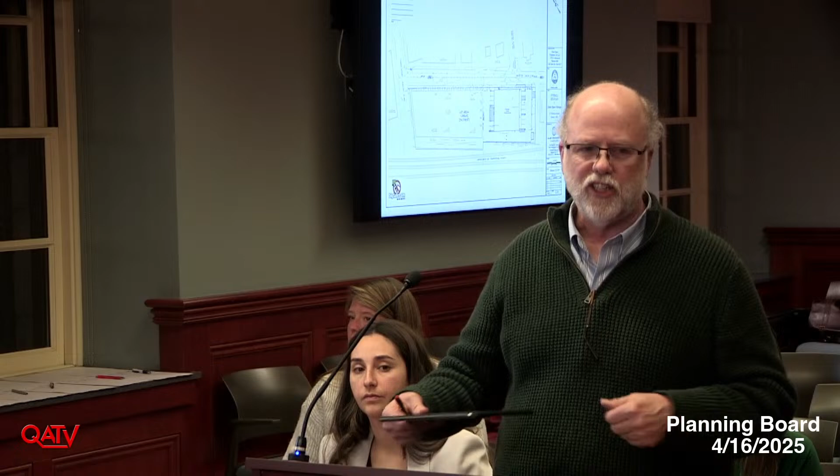Absolutely. So we built one in Jamaica Plain, right on the orange line. We built one in Needham, right on the commuter rail. Okay. We built one in Bridgeport, right on the train tracks. So we are familiar with the process and the concern. Thank you.

So this is a public hearing, so we'll see if anybody here would like to make public comment on this. You can also sign in along the window for or against. Is anyone here to speak on this project? No? Okay. All right, so I think we will need to continue. With a neighborhood meeting, I think the two months should give this project enough elbow room to finish up the review.

Okay, so that would be continuance to June 25th. Is there a motion? To continue to June 25th. Second. Okay, all those in favor? Aye. Okay, so that's unanimous. Thank you very much. Good luck with the MBTA.

I'm on an MBTA project, so I know all the bureaucracy, trust me, three years. Even worse than the power suppliers, huh? Yeah, because I'm at South Station, we got Keolis, Amtrak, MBTA, the Mass Department of Transportation, there's Homeland Security involved there...

All right, good job. We have four business meeting items, so we'll keep moving forward. I think we'll start with 1562 and 1570 Hancock Street, Planning Board Case Number 2022-COC-01. It's a request for modification of previously approved plans. Mr. Stevens? Yeah, thank you, Madam Chair, through you to the board.